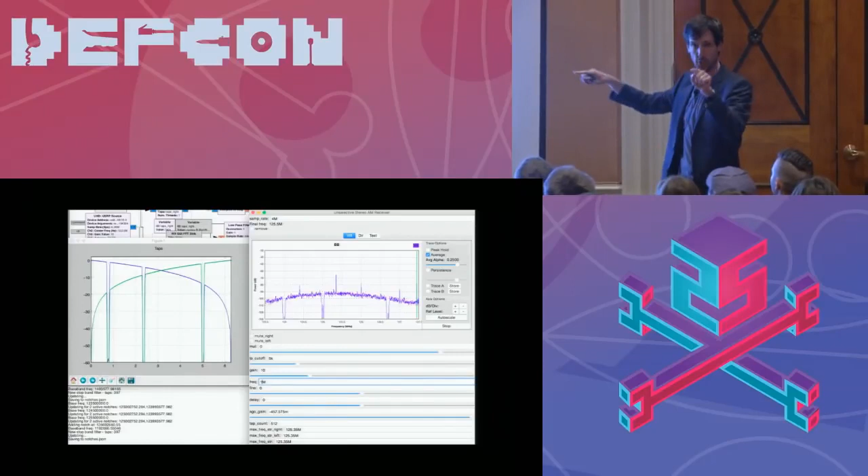And so I thought it would be cool if you could interactively notch out those frequencies that you didn't want to listen to. And so what this does is, and I'll show you, you can click on the baseband spectrum on the things that you want to notch out. It'll recompute the filter with those notches included, and then apply that to the left and right slopes. And it does it globally, so you can change the frequency of your SDR, and then it'll actually recompute everything that's in your passband and always keep the stuff out that you don't want to listen to.

So if I could have as quiet as you can, I'll turn the volume up here so you can hopefully hear it. And so I'm just going to, oh, there we go. So notice I clicked on that and the tone went away. I don't know if you can get the stereo effect. Hopefully you can. So see, I clicked there, it applied the notch and then recomputed that. And I'm changing the baseband frequency, and so it's shifting all the notches along to keep them on the right frequency.

And so I moved to where there's ACARS, and it's very loud and powerful. You don't want to listen to it, so I notched that out. Notched that out too. So it's cool, right? Because I'm not actually clicking on the channel that I want to listen to. It just all comes in and you hear the most powerful thing.

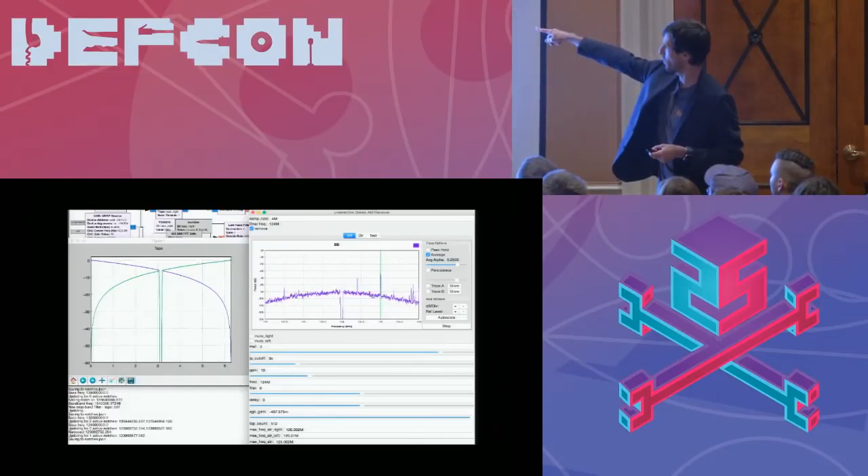And then what's nice is that you can click on remove if you want to remove a notch, and then click on the baseband spectrum, and then it'll actually remove that notch, recompute the filter, and then you get, in this case, the unwanted tone back.

So that's that. Now, I mentioned that slope filter, and it wasn't immediately obvious to me how you generate that. And it turns out it's actually really, really easy. This is done in a single line of Python in a GRC block that I'll show you. Basically, you use NumPy and use linspace to create a ramp between 0 and 1 over the number of taps that you want. You do an FFT shift, so it basically rearranges one half and the other half back to back. You do an inverse Fourier transform, and then you shift it back.

So what you've done is essentially you say, I want this frequency response, and then you take the inverse FFT, and then it gives you the time domain taps that you can apply in a normal FIR filter. And that's all it is. It's really basic. So I've got a blue arrow, which means show you the actual thing. Now, any questions so far?

Who actually listens to the Aero band and listens to cockpit and tower and all that kind of stuff? A few of you, all right. Was there a question over there?

Just curious, with the interactive notch, you could do equalization to null out tones that are continuous, but is that too computationally intensive across that wide spectrum? So that's a very good question. So I don't have to repeat the question because you've spoken to the mic. Yeah, so

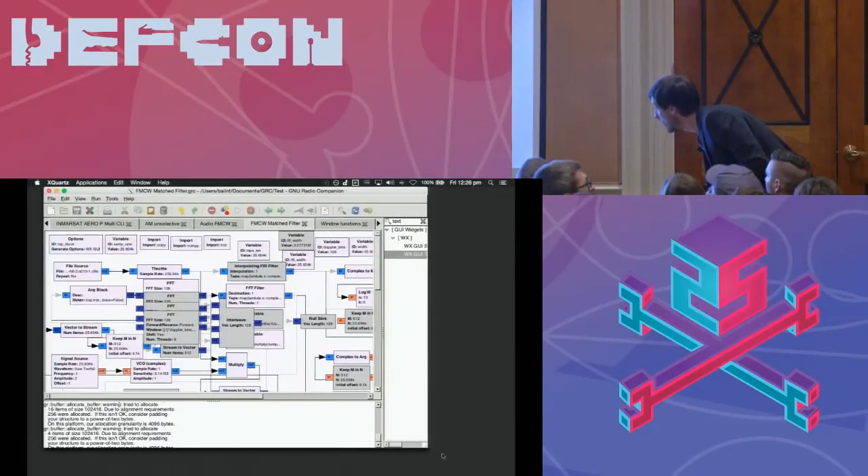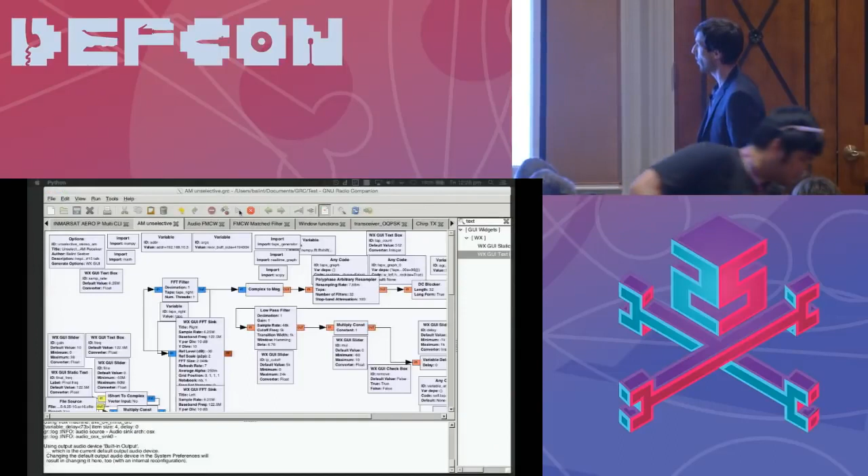So let me find the flow graph here. I'm going to have a resolution problem, so let me just transfer this, make the thing fit. All right, so I'm looking for AM unselective, and turn that off. So I'm going to just do a live demo, or not a pre-recorded demo.

So that's that, and that's that. So at the moment I've got a single notch in there, and if I take it out, you can hear the tone, right? You don't want that. So if you watch in the console there, I've got this notches.json that contains the list.

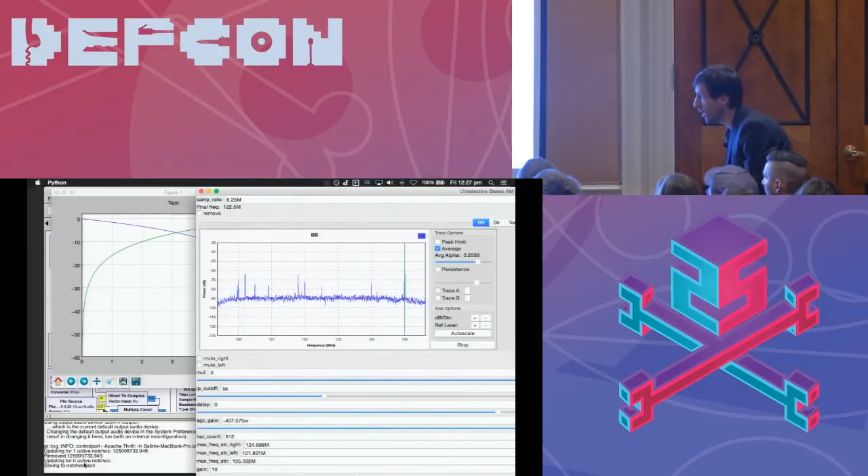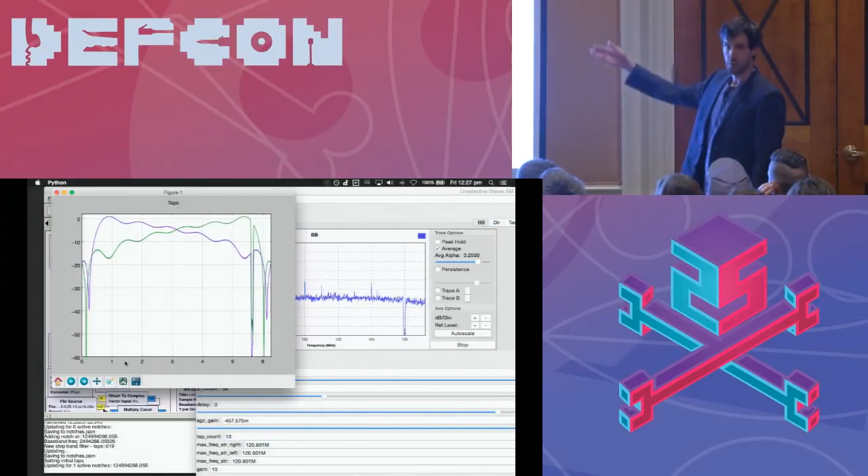So if I click this, then it'll load the notches, calculate a complex filter, and then rotate it up to the baseband frequency that I selected, and then apply that here. And what's nice is that you can also change the number of taps. So if I made it 13 instead of 512, then obviously it changes the look of your frequency response.

And one other thing, my friend Ian Buckley observed this, that if you actually add a delay between the left and the right channel, especially if you're on headphones, then it emphasizes the stereo effect even more. I don't know whether we'll necessarily be able to tell here, but if we make, I think this was like, yeah, you'll need to play with this yourself. But you can add a delay to emphasize that. And you can mute the left, mute the right.

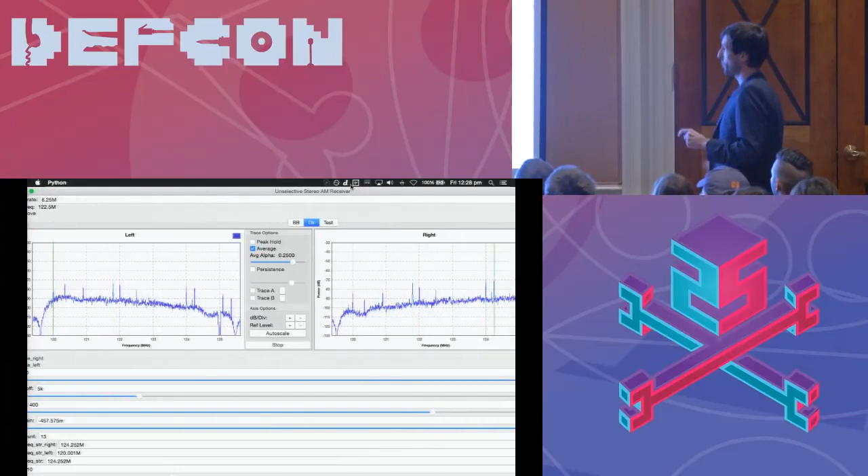And if you look at the actual response of the output of each filter, you can see the baseband plus the filter showing that characteristic roll off to one side and the other one. And the green lines that are appearing are just basically selecting the FFT bin that has the strongest energy in it. So that's most likely the audio that you're hearing in that frequency, which is being updated at the bottom there, max frequency right and left.

So again, this is just the implementation. The original idea was Kevin's, but I thought it might be fun to implement in GNU Radio. I can take you through the flow graph very quickly. I've got a file source here, and then you get your complex baseband output. And as I mentioned, you take one line up to one filter that contains the right channel taps, and then you take the baseband to the other filter that has the left channel taps.

And what's nice, actually, is that you only need to compute one set of taps, because the other channel is just the same taps, but in reverse, which is handy. And then once you have done the filtering, you immediately do the complex to mag, which is the AM demod step. And then you resample it to match the sample rate of your sound card.

I've got a DC block in there as well to remove any DC from the AM demodulated signal. I've got an AGC so that the audio level that comes out the speaker is always more or less normalized. A low pass filter, since AM is quite narrow band here, so just to focus on that one channel at the audio pass band, and then it just goes into one channel of the audio sink. And that's all there is to it.

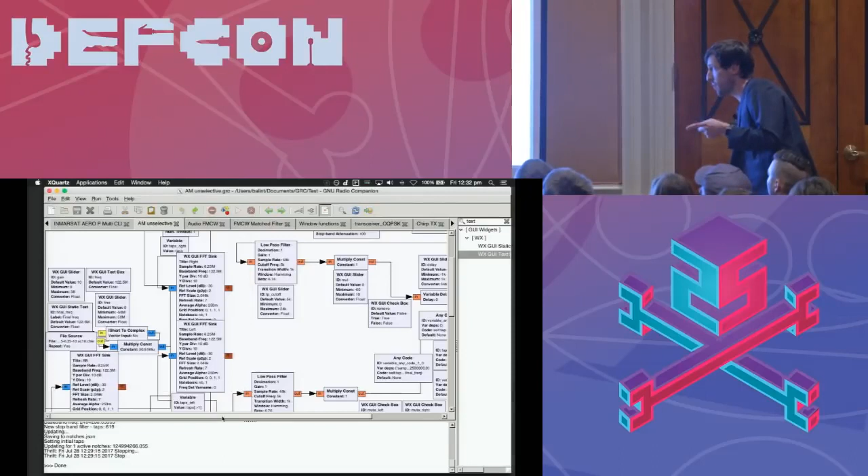And then in terms of actually clicking on stuff, there's a callback mechanism here. With these FFT GUI sinks, you can specify a variable to take the frequency that you clicked on. So when that variable changes over here, then I have a little bit of Python that's a class, and it has this add notch function in it, and so it takes the click frequency.

And if remove is disabled, then it adds the notch, and if remove is enabled, then it removes the notch at that frequency. And so there's just a little bit of Python that manages the global database of values. And once that happens, I think it's here.

The tap generator class is initialized here, and it basically takes the initial set of taps, which is just that initial left and right slope, and then self.taps is, I think, a reference to the actual taps that the generator will update. So the generator will generate new taps and then call a callback registered within GRC to update the taps, and then it will update in the FFT filter and update on the graph.

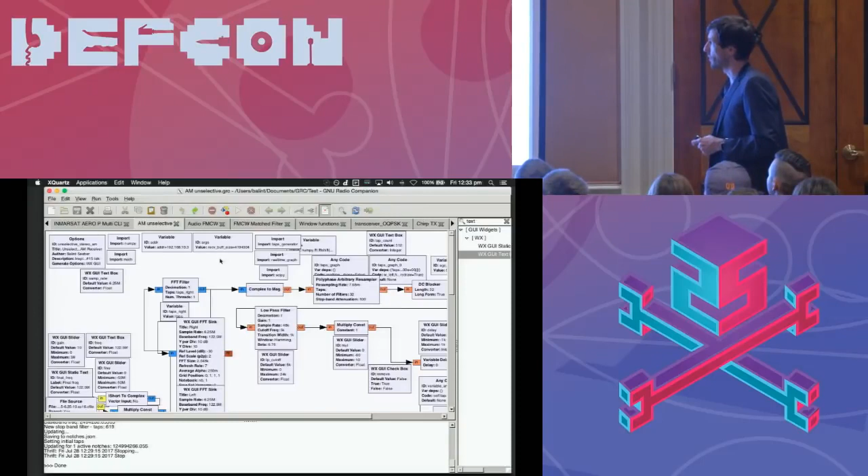And that's it, really. So conceptually, at least, it's pretty elegant. And again, that's props to Kevin for figuring that out. Any questions on any of that so far? Okay.

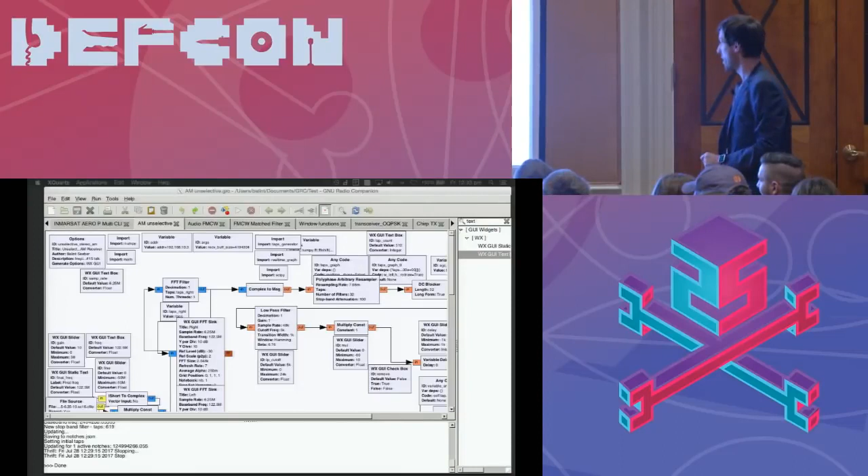All right. So next on the agenda, this is the third and final part, is radar, and particularly FMCW radar. I spoke a little bit about this last year, but I'd like to show you some more and explain some more concepts to you as well. And to do a bit of a recap, who's seen these primary surveillance radars at airports when you fly? You see them rotating there.

This is a basic kind of CW radar. And if you watch here, as it rotates, I'm sitting on a hill with a USRP on the frequency. And on the left-hand side, it's plotting the magnitude of the signal received. And you can see that it's triggering, play it again, it's triggering on the initial transmission from the radar, and the radar then switches to receive mode to listen to any echoes that are coming back from, in this case, airplanes.

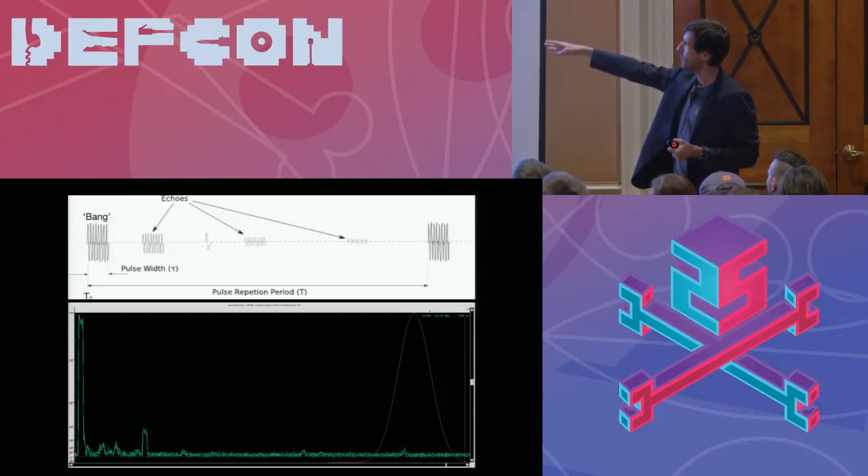And you can see there that there's also some responses coming back very close in time. So I'm picking up both the initial burst of the radar and what turns out to be ground clutter, mainly nearby. And so what is a radar return and how does that work? So this is an example return down the bottom, just complex IQ that's been, again, turned into AM essentially, the magnitude. And the way it works is that the radar sends out what's called a bang, which is that initial short pulse. And in this case, it's CW, so it's just a continuous wave at a single frequency.

And then the radar switches to receive very quickly, and then it waits for these echoes to come back because the radio energy will reflect off, for example, aircraft fuselages, and some of that energy, just a small portion, will come back and be collected by that massive dish that's rotating on the radar. And it's so massive because the signals are so weak, and so you want a lot of gain at the antenna.

And then once that period has elapsed, which is the pulse repetition period, then a new pulse is sent out, and then the process just continues. And this can happen hundreds or thousands of times per second.

And there are some radar concepts which are important to get a hold of. One is that pulse repetition interval or frequency. So that's the amount of time or how many times per second that pulse is sent out, and then the wait period. I'm going to call it PRF, which is the number of times that happens per second. And the width of the actual transmitted pulse, so for how long the radar is actually transmitting.

That's also important. So the way you actually figure out how far an object is away from you is by looking at the delay between when the signal went out and then when you had the signal come back. And this is called the round-trip time. I'll explain that in a little bit more detail in a moment. But if you consider these two diagrams here from RF Cafe, these thick black lines here are when the transmitted pulse was sent out. And then you have this return here that comes back.

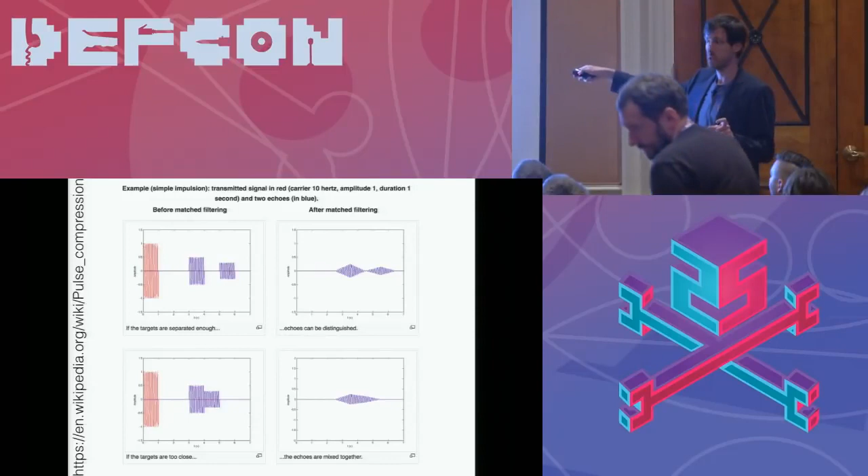And so if you take a matched filter, which is in this case just a filter for the frequency that was sent out, then that means you can ignore everything else. And if you apply the filter, then you get this plot on the right. So you ignore the transmitted pulse, and then the peak of the response here is at the time where that target was. And then this other target is further out, and so you get a lower amplitude response, but again, you get the peak there.

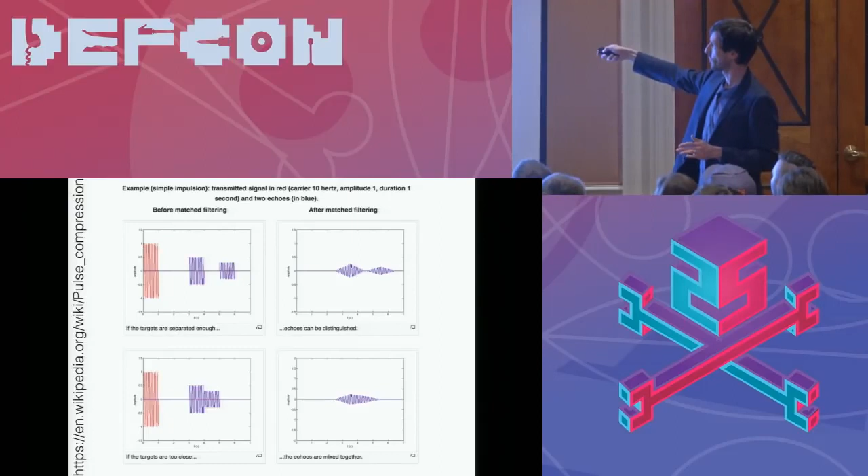And this is not the best, right, because you have this ramp up and ramp down, and you'd like to have a much more accurate definition in the time domain of where that target response actually is. And the bigger issue is that if you have two targets that are close together like this, so those two targets are now not separated by as much distance and therefore time, then the response, the echo, actually blurs together. And so now it looks like there's only a single target if you were to apply a naive detection strategy. So that's why CW has these drawbacks.

And a simple alternative, and there are many other radar alternatives, is FMCW. And what that means is it's frequency modulated continuous wave. So instead of just sending out a fixed carrier wave, you actually send out a carrier wave that increases in frequency, or might decrease in frequency. And this is what it looks like in the time domain. So you start at a low frequency, and then you quickly ramp up. And it might be linear, it might not be, but you can ramp up. And by the end of your transmission, you're actually transmitting a high frequency.

And the reason why FMCW is good is because these chirps, this is known as a chirp when you have something increasing or decreasing in frequency, have the property of strong self-correlation. It's got a really good autocorrelation property. And what that means is if you take that signal and you mix it with a copy of itself, then you'll get a really good response. But if you mix it with anything else, then you get a really bad response, which is not the case for what we just saw with the CW tone, because you get this mixing here and the ambiguous response.

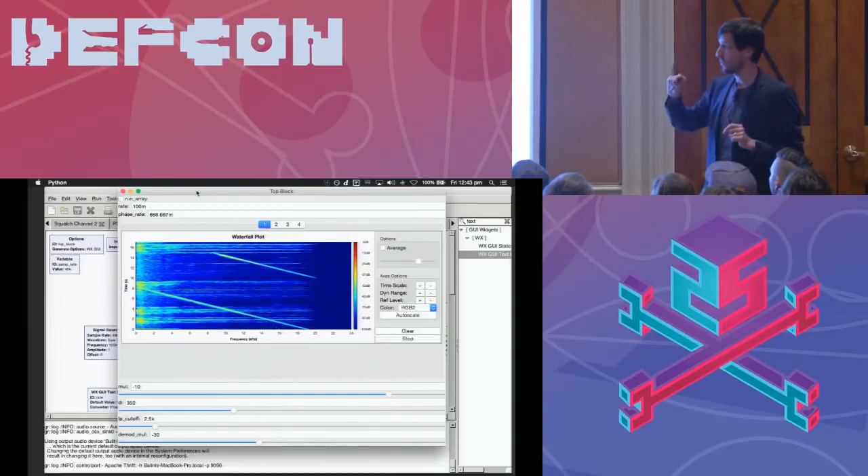Does anybody want to whistle or make a tone? There you go. Just to prove to you that it's live. And now I'm going to let you hear the tone, and you'll see it on the spectrum. So you can't even hear that, but the microphone and the speakers still generate a response. Okay, so this is a chirp. It's a very slow chirp, but it's a chirp nonetheless. The radar chirps are much, much quicker, and I'll show you what that sounds like and looks like in a moment. So this is the frequency response.

In the time domain, a common construction that you use is a sawtooth wave. So usually for a signal source in GNU Radio, you might have a sine wave. But here I'm using a sawtooth, and I hook that up to a VCO, a voltage-controlled oscillator. So what I'm effectively doing is I'm putting in a linear ramp, a linear voltage control, and then the VCO will turn that into a frequency modulated continuous wave. And we can see what that looks like here.

So I'm going to speed up the chirp here with the, where is it? Do I not have that exposed here? Delay, multiplier, low pass cutoff. Ah, here. So this will take 10 seconds to do the chirp. I'm going to make it do it every second. Right? Now I'm going to make it do it 10 times a second.

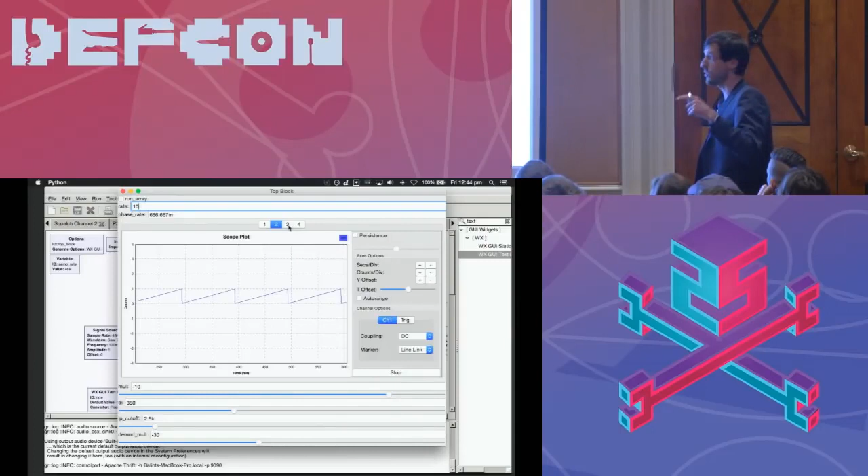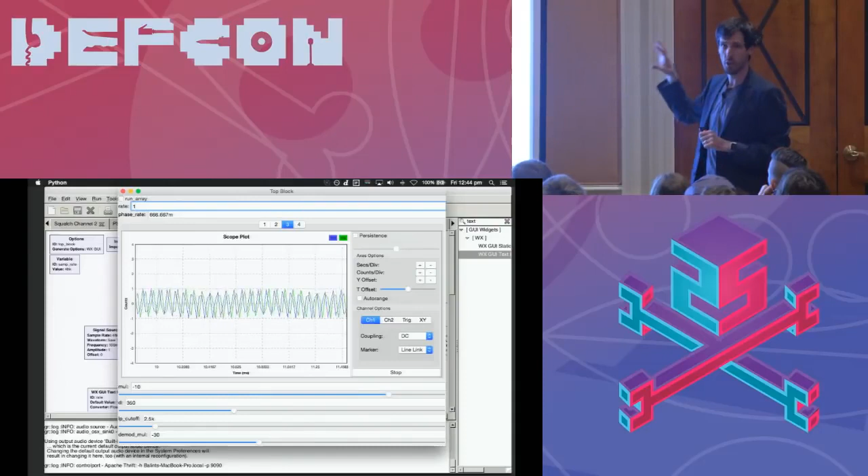Okay? Now, if you look at it in the time domain, this is the output of the sawtooth generator, right? So this is not the FMCW output yet. This is just controlling the VCO. Once you feed that through the VCO, it looks like this. So let me slow that down so you can see it a little bit better. This is the time domain plot of the complex output of the VCO block. And you can see that you get a complex sinusoid, but it's increasing in frequency and then it resets. So this is the basis of a chirp radar. We're listening to the chirp here. All right.

So again, this should be familiar to you now. We saw it in the complex domain, but here it's in the real domain. Now, in this case, we've been listening to a full duty cycle chirp generator, so it's constantly generating the chirp, and as soon as one finishes, the next one starts. In the radar scenario we looked at before, we sent out a chirp, we were quiet for a while, and then we sent out another chirp.

You can do both. They're both equally valid. They just require different sorts of hardware configurations. I'm going to start talking about the full duty cycle continuous version now. What did I say there?

So usually there are low-pass filters and high-pass filters, and you can think about how they might shape the spectrum. You can make a filter of whatever you want. You can even use filters in the digital domain for like the access control word or a preamble for a digital packet. Here, our filter is actually going to be the chirp itself. So the idea is that whenever it hears a chirp and you put it through the filter, you will get the maximum response from your filter when the incoming chirp lines up with the chirp that we've defined in the filter.

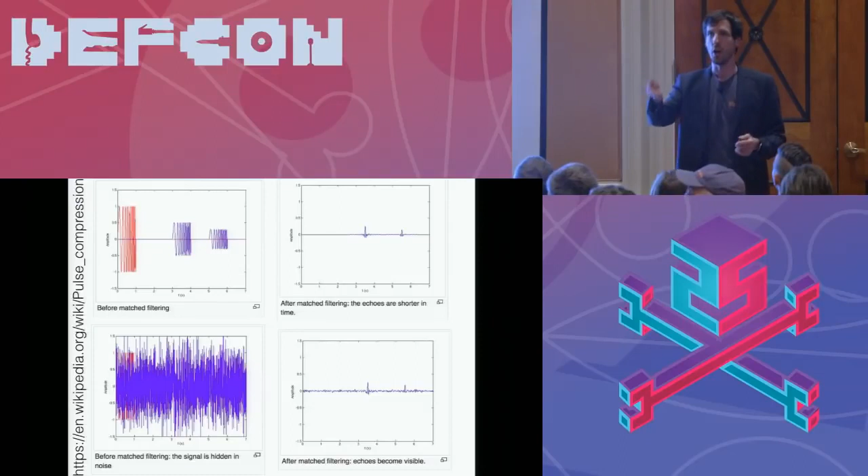The point is raised that if you wanted to figure out the rotation rate, what you would do, completely correct, is you would run an autocorrelation with the capture and do a correlation with itself, and as soon as the similar kind of features match up again, you'll get a response at the time where the radar has completed a single rotation. Thank you very much.

Any other questions? That's great. Thank you for these questions. It's really good. No, I'll move on then.

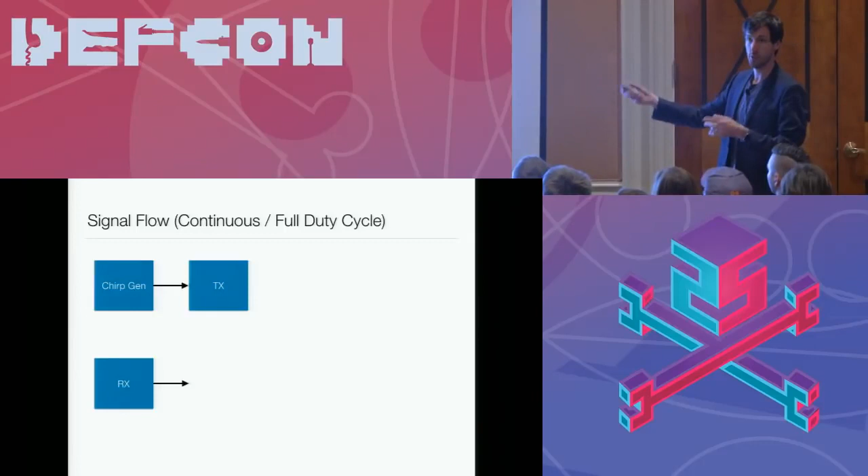So with this continuous or full duty cycle radar system, you have your chirp generator, and that's transmitted. As you heard here, it's being transmitted out of the speakers. And then the receiver, in that demonstration, was the microphone in my laptop. And there, I then mix the input with the chirp. Because we're receiving and generating this simultaneously on the same hardware, the clocks are synchronized.

Because I'm using the audio hardware, that doesn't allow you to start transmitting and receiving the streams at the same time. That's different on, say, a USRP, which I'll show you next. And that's why I have this delay slot factor that you can change, and I'll show you that in a minute. But you mix the two together, and then you get the de-chirp signal.

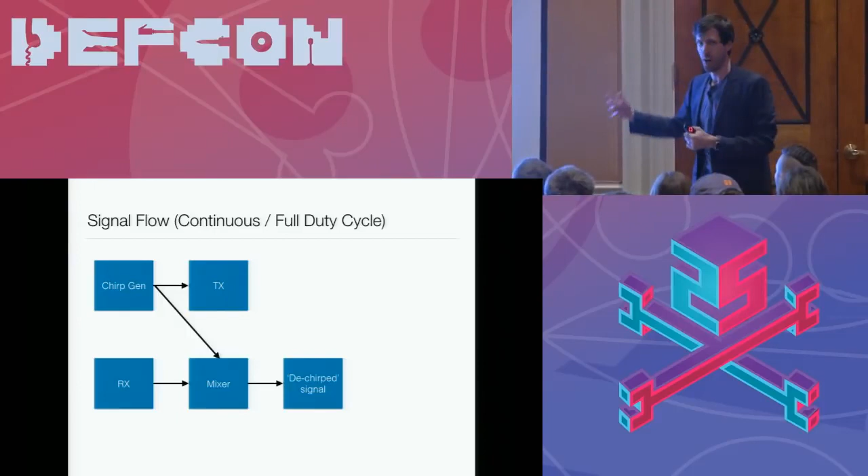And the de-chirp signal holds wonders that I'll try to explain to you, but it means you can do some really sophisticated processing in a pretty simple way and get much richer information about what's going on in the space around you. What's important to note is that once you de-chirp the receive signal, you get constant tones. When it de-chirps itself, you'll just get a DC tone, and any other reflections will generate other tones at different frequencies. And that's the key there.

The cool thing about chirp radar is that once you de-chirp stuff, your reflections become tones at different frequencies, and that frequency is controlled by the distance from your radar, which is kind of mind-blowing when you think about it. It's just a really nice way all the math falls out. And then you can just use FFTs and do cool stuff.

Does that relationship depend on if it's a linear or a logarithmic chirp? I don't think so, because you're still just doing it on the basis of the response of a filter. So you're still looking for a peak response. You could send out any kind of signal you wanted to. And I'll demonstrate that actually.

The last thing I'll show you is passive radar using exactly these concepts, using digital television signals off aeroplanes. So stick around if you want to see that. That's what this is building up to.

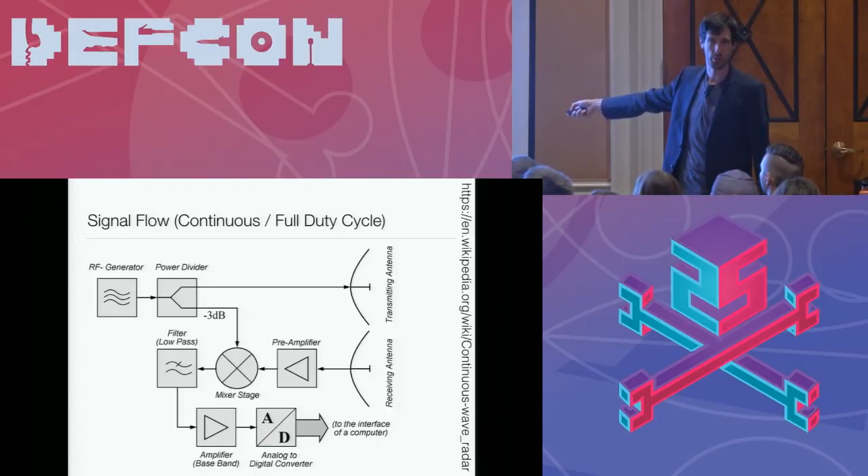So that's this simple kind of structure. So what I'm going to try and do now is take you through how you do range calculations, and then, this is the magical new part, how to do Doppler calculations using FMCW and GRC. And it's basically all FFTs.

This appeared like this massive mystery black box to me for the longest time. When I finally sat down and looked at it, it's actually really, really elegant. So my goal here today is to make you try to understand at least a little bit of this. So this is a plot in the frequency domain, right? We talked about chirps. We know that they look like this on the spectrum.

Here you've got time going from left to right and frequency from bottom to top. And the red signal here is the chirp that you're transmitting, and the green signal is the echo. So remember, an echo is just going to send back what you transmitted, but with a delay in time, right? So as you can see, the green is delayed a little bit, delta t, from the original transmission.

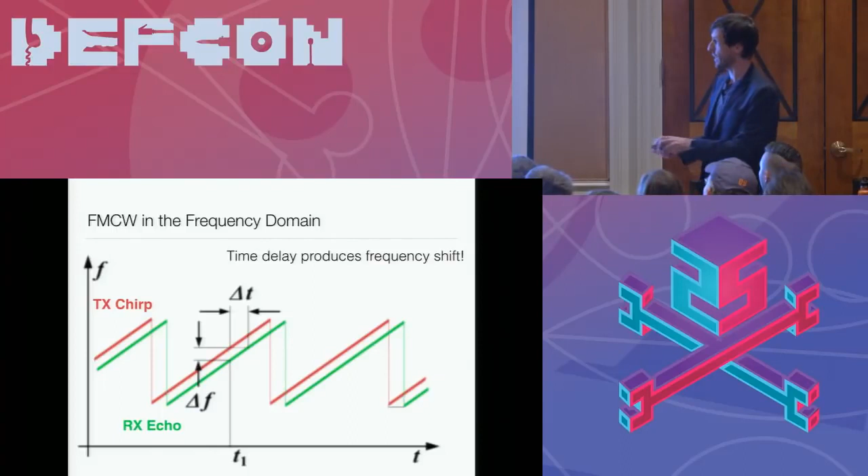Now, the beautiful thing about this, as I mentioned, is that any time delay will produce a frequency shift at any single sample in time. So if we look at time t1, you've got a frequency shift from your transmitted tone at that particular point in time to your received echo.

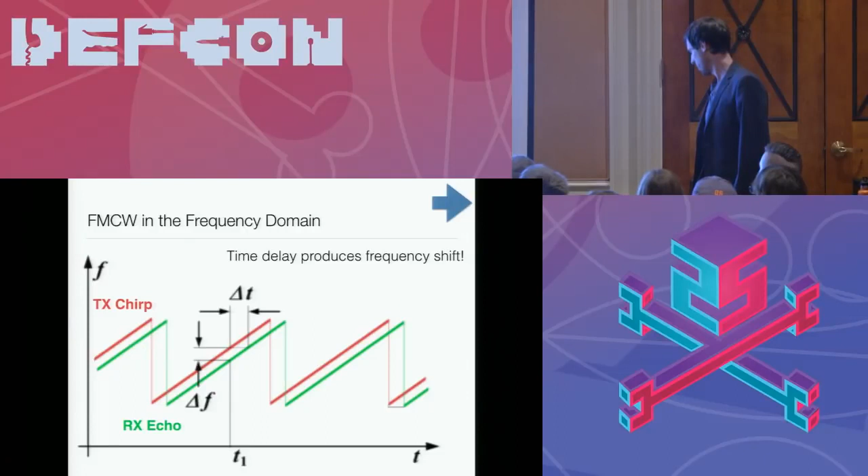And what happens is, what was I going to demonstrate to you there? Maybe the whole thing here. Yeah, that's what I was going to show you, I remember.

So going back to the audio demo, we had this, right? And we know what the VCO input looks like, we know what the VCO output looks like. And now we're going to look at the FFT of the output of the de-chirping, of the mixing, right? So what this is doing is it's taking the chirp and then it's going to multiply that by what is being received from the microphone.

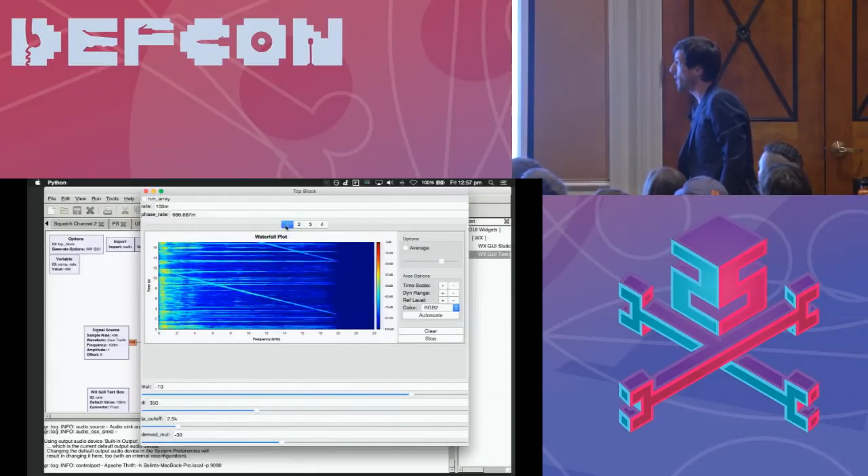And what you'll notice here is if you compare this one to this one, hopefully you'll see it looks like the spectrum is being rotated over and over again at a fixed rate. See how it looks like the entire spectrum is shifting? So actually, do people want to whistle? You'll see your whistles come out, but there'll be diagonal lines here.

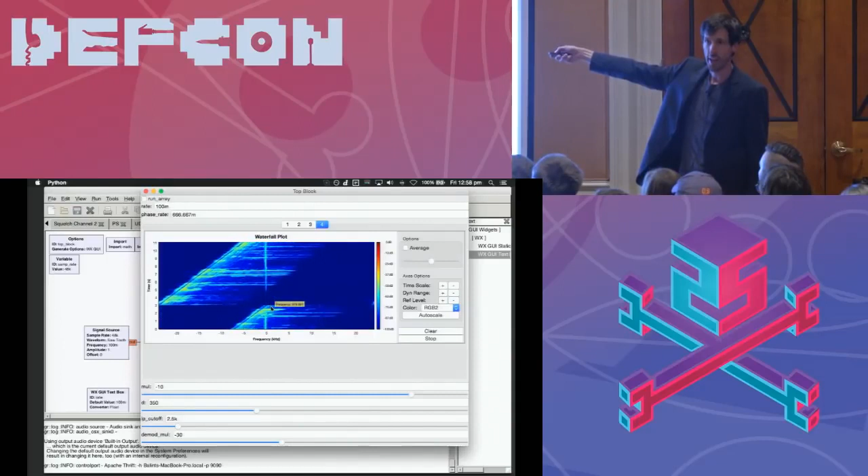So see, this is me. And this is the cool thing. Our chirp signal, remember I was telling you it would turn into a fixed tone? Can you all see the fixed tone here? It's that line coming down the middle at roughly DC, right? That is the tone that we want to receive.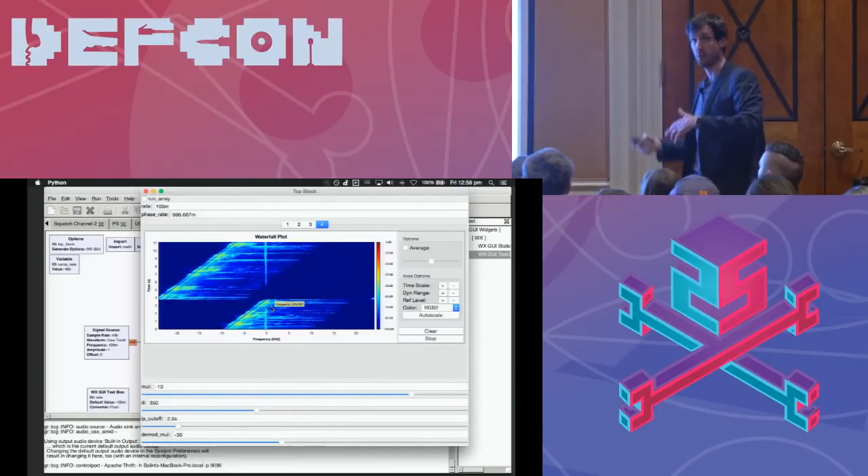And any other tones that end up, I think in this case to the left of it, will be echoes that have come back from around the room into the microphone on the laptop. And so that frequency difference, because remember this is in the frequency domain now, is going to give you your virtual range information, right? Which is pretty neat.

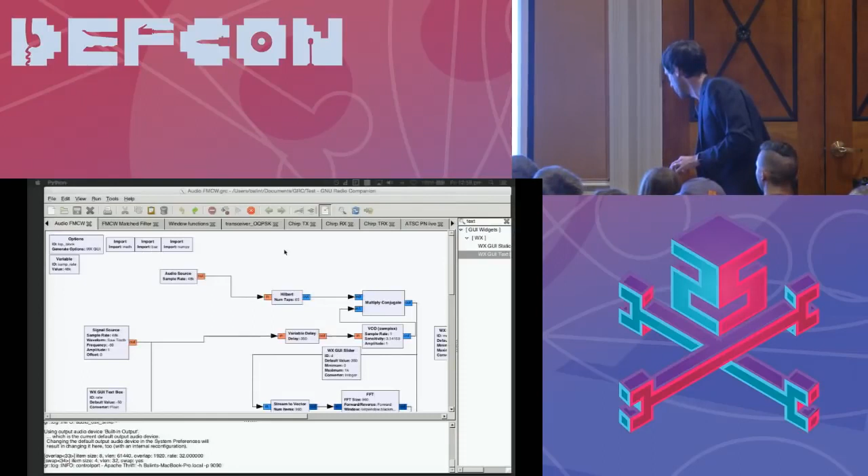Now, what does this look like? I showed this last year, but I've hopefully explained things a little better so that it makes more sense. What I'm going to show you now is the same thing, but actually running in the proper mode. So this is the chirp again. It's running at a higher rate because we want to be able to update the display more. And you see when I'm talking, it's still picking me up, but because it's constantly rotating the spectrum, it doesn't look like a proper frequency response now.

So what I'm going to do is get my other laptop to be the target. And I'm going to set my delay slider so that you see the DC part of it somewhere. Okay, apparently it's not there.

Nate Temple, the genius here, pointed out that I'm trying to move my laptop in front of speakers that aren't actually outputting anything. I want to use the speakers in my laptop because that's where the microphone is, not those speakers. Thanks, Nate.

Nate is an absolute legend, by the way. If you didn't get to see his Cyberspectrum talk from the other night, I recommend you go online and watch it because he has built some amazing stuff.

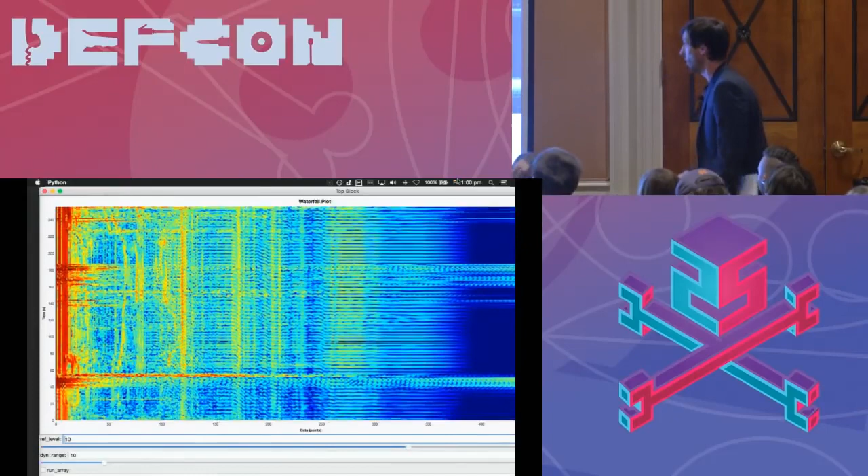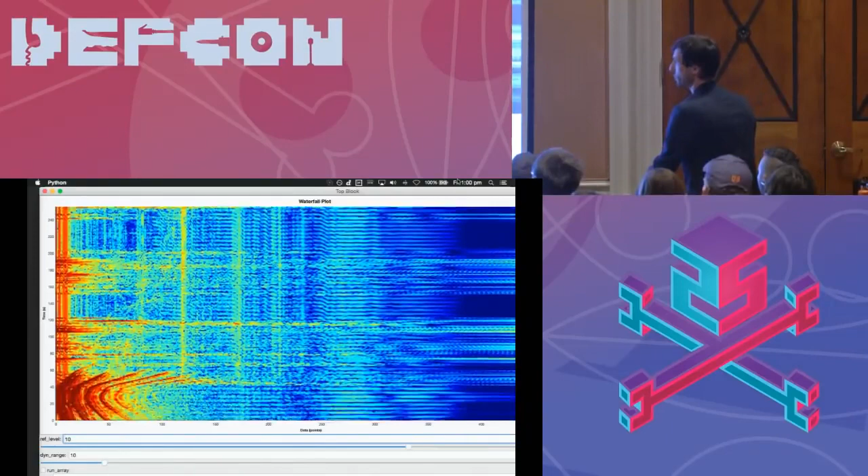All right, here we go. This is better now. So what I'm going to do is, this is the DC component, and because I'm talking, we're just going to get this noise showing up here. But if I put my laptop here, then you can see there's that main response there that is directly related to the height of the laptop.

Don't clap, though, because then you'll upset the microphone. Right? So, that's all right. I planned that.

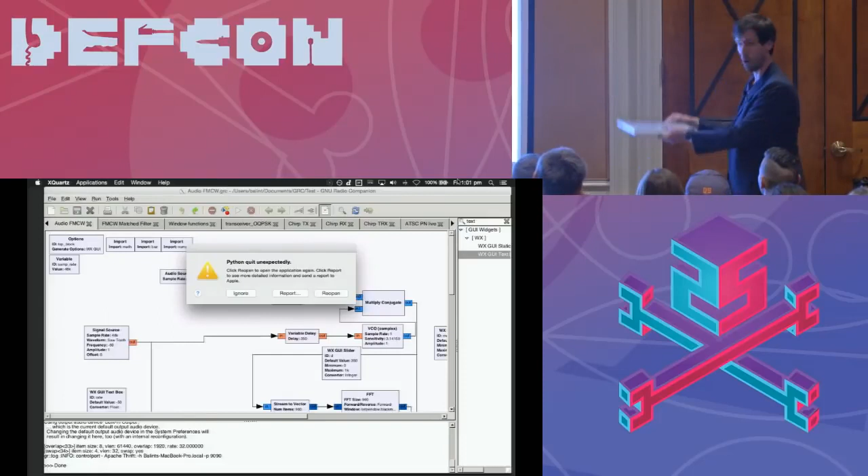So what's happening here? A chirp is being sent out from the laptop. I mean, this is a chirp. Those air molecules are being vibrated, and then that audio wave is moving up, hitting the bottom side of my laptop, and then being reflected back down to the microphone. And amazingly, even though it's hearing itself, the microphone can still discern the response from an object way out here. So that's the power of FMCW.

Now, there was another little thing in there that was on my screen. I will show you that. That's actually the Doppler plot, and I'll come to that. What that gives you is not only range information, but velocity information. So you can tell how quickly a target is moving. And that's really cool when it comes to aircraft.

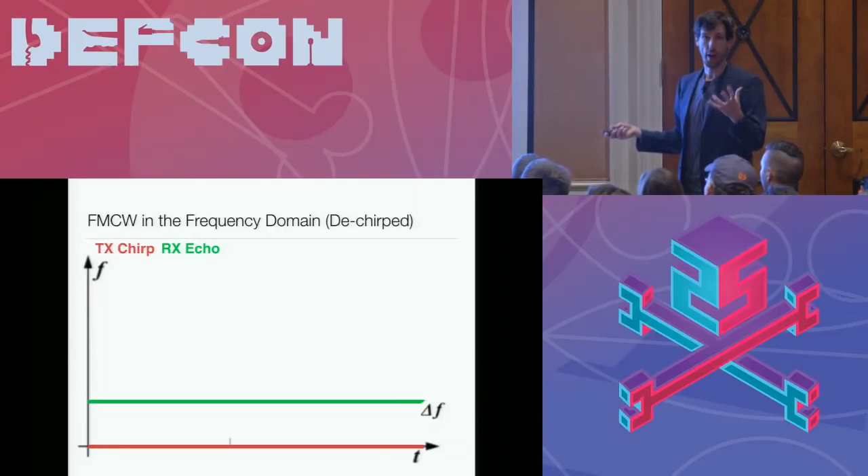So what I want to show you here now is this plot where instead of looking at the original frequency domain, what we received, this is the domain once we've done the de-chirping. So we have that DC component here, and then in the green line, this is now our target return tone, right? Because we've de-chirped it. And so you have this difference in frequency. So the frequency change implies that time delay, and therefore virtual range.

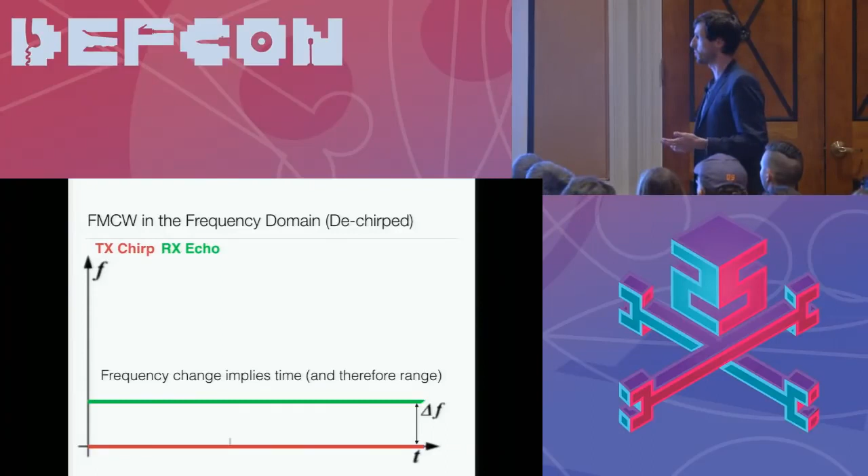Now, what's neat is that you can take the de-chirped output and then pass it through an FFT, right? Because an FFT will give you the energy in each bin. And so the trick here is that you use an FFT. You know how you have a certain size in your FFT, a certain number of points that you transform? The number of points in your FFT, you can make the same number of samples as what is made up in a single chirp, right?

And to calculate how far away that is, you know how long one sample lasts, because you set a sample rate on your SDR, right? So 10 megahertz or whatever, 1 megahertz. So you can calculate 1 over that to get the period of a single sample. And each bin, in terms of duration, maps up with the duration of a single sample.

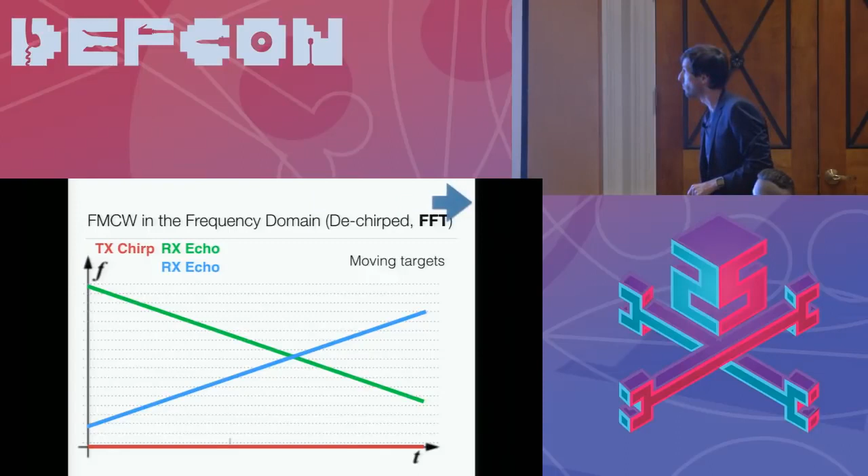Maybe that's what I was going to demo, but I'll do that later because time is short.

So again, as I was saying, the sample rate sets the duration of a single sample and therefore limits your range resolution. Because if you consider you get discretized bins coming out of an FFT, and the total length of that is going to be your unambiguous possible round trip time. And so your pulse repetition frequency sets your unambiguous range, but the sample rate also sets the distinct range that you can resolve within a single bin.

So as you step from one bin to the next, that's going to be some amount of range that you go, from one to the next. And so what you have to consider is that targets, depending upon your radar system, might be differently spaced, but they might fall within the range of a single bin. And so you'll get one return for multiple targets in a single bin, and that's ambiguous. So you want to do something which is Doppler processing to make that unambiguous.

And as I was saying, you've got different radar geometries. So you've got a monostatic system where the transmitter and receiver are co-located, and so it's just a direct line of sight round trip time. But if you have a bistatic radar system where the receiver is separate from the transmitter, then you have to take into account the geometry because that delay is going to be different. You might have a target way out here and you'll have the signal bounce out and then come back, or it might be in between the two and so on. So important to keep that in mind.

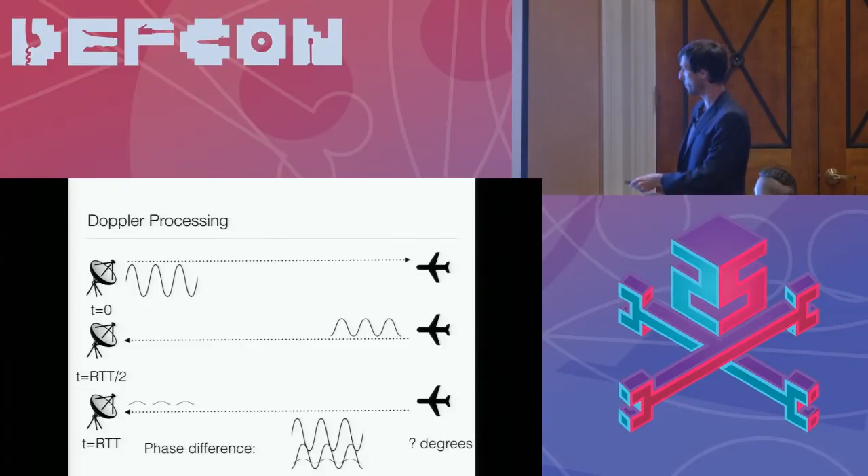And if you notice carefully here, the wave that is returned is slightly offset. See that? So see there and then there. It's a slightly different phase on that wave. And so when it comes back, the phase difference is going to be slightly different as well. And when we compare them, we get some arbitrary phase offset. Now, these are two distinct pulses.

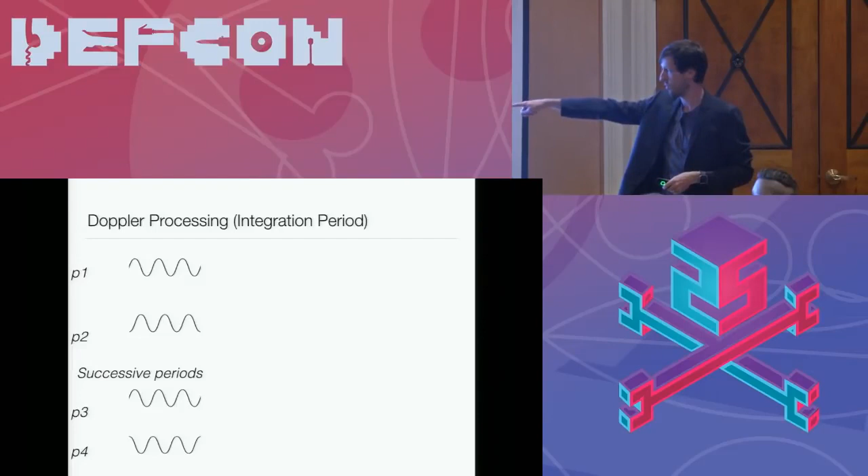Now let's consider 4 in more or less successive time order. So the first one comes back, the second one comes back with a difference, third one comes back, in this case it's different because the plane moved again and imparted another phase change. And then again, we've got a different phase offset in the 4th period there. And remember, every chirp period that gets sent out, we get this different energy coming back to the receiver. It's the same chirp or the same signal. The magnitude will look the same, but the phase will be different.

And what you have to think about is when you do FFTs, when we look at them on the waterfall or when we usually think about them, what are you doing? You're taking the FFT, which gives you always a complex output, and you always end up taking the magnitude of that complex output. And the effect of that is, anyone? You lose data. What do you lose? You lose the phase information.

So here we want to use that phase information. And the integration period is important because that's the period over which you're monitoring these phase changes in each of the range bins. Does that make sense? So the idea is to get that phase information from each FFT bin over that integration period. And then think about this. What is a changing phase over time? It's a rotating, what's the magic P word? It's a phasor, right? So you've got a phasor going around.

And I think I have a blue arrow here, yes. So, just to illustrate that a little bit more, very simply, in GNU Radio, because we usually use fast sample rates, everything is high frequency. Here I've got a signal source, which is a sine wave. The frequency is 0.2 hertz, okay? So that phasor is rotating very slowly. And we can very easily illustrate that. This is an IQ plot. It's a scope plot in XY mode. And you can see the samples. This is a normal sine wave, right?

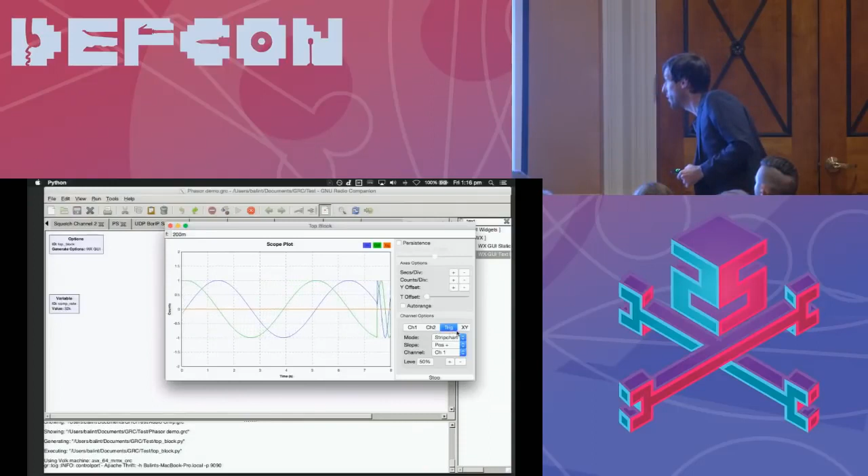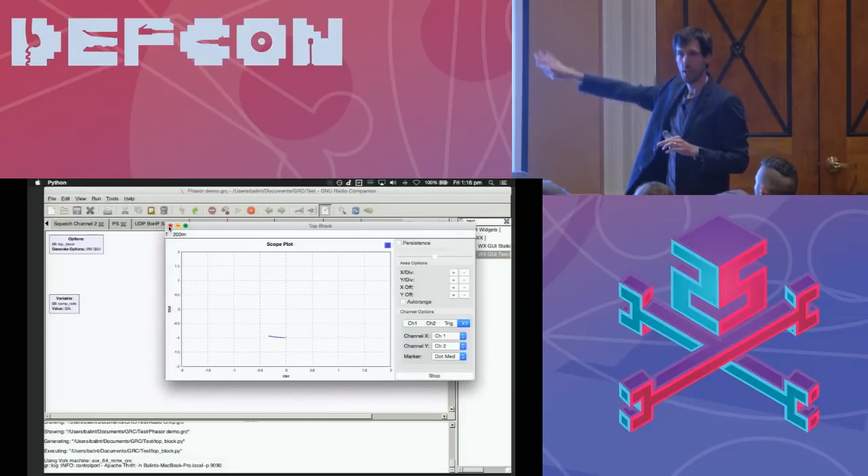Where are you? It takes a long time because it's slow. There it is. Let's go, I think, strip chart. Yeah, there it is. So we have the normal sine wave that's being generated. But if you look at it on XY, then it's just going to be a phasor that's rotating at a fixed rate around your unit circle on a complex plane. And so what I want you to think about is exactly this in a single range bin. So you got your echo coming back, it's changing in phase, and so you'll get a bit of this in that range bin. And of course, what happens when you take the FFT of a sine wave in this case? You'll get a response in some bin that maps to the frequency of the thing.

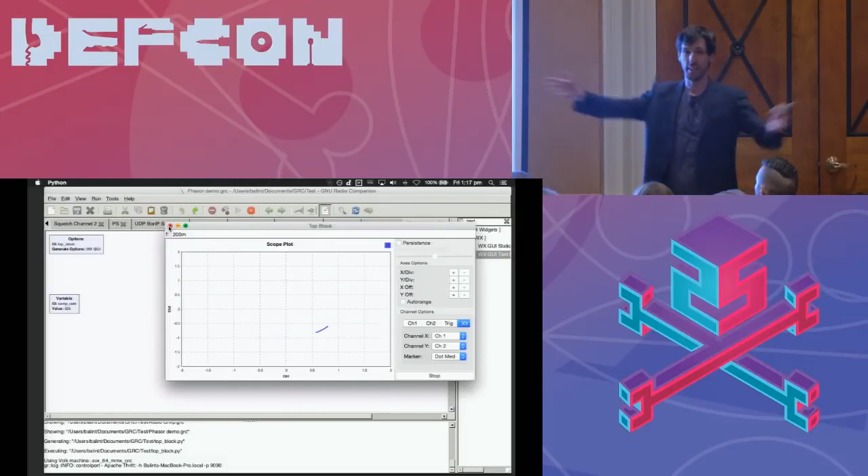So what does that imply? Can anybody tell me? Once you end up taking the FFTs of the columns, maybe I'll show you the next slide and somebody can tell me. So we did all that.

Okay, so, microphone stopped working? Hello? Oh, there we go, testing. It's not even wireless, so we couldn't have blamed somebody trying to DOS my mic. Right.

And then once you've populated all of these with the complex outputs of the first FFT part of the range information, you take the FFTs column-wise. And so you're doing an FFT to look at the phase changes of the returns at each range bin. And what does that mean? The Doppler shift and the movement of the target imparts the phase change, and that causes that phasor to rotate. And the faster or slower, and whether it's forward or reversed, rotating in that phasor, tells you how fast the object is moving.

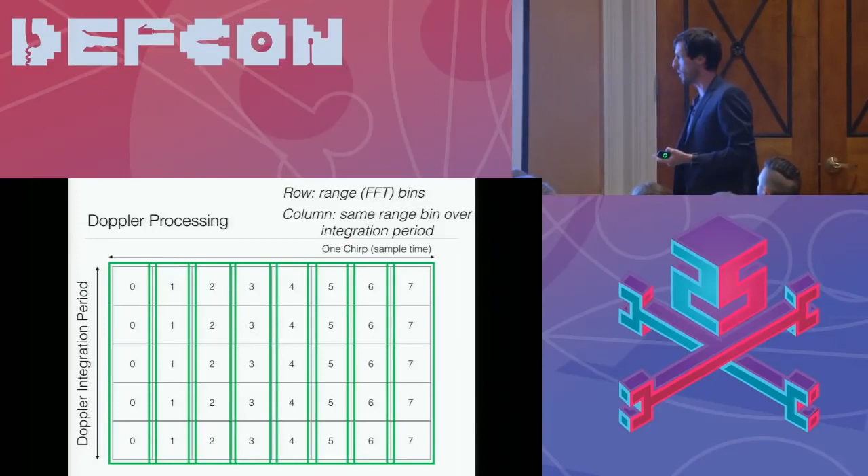now, remember this slide earlier in the presentation? What was I showing you when I showed that slide? An interleaver. Look familiar? Interleaver? So what you can do in GNU Radio is, I just wrote a simple row column interleaver block, and it takes the output of the first FFT stage, and then once it fills the interleaver, it outputs everything into another FFT, and then you've got all your data, range and velocity information.

Okay, so interleaver. And so this is a neat little tweak that I made to my interleaver. Usually with an interleaver, you need to fill up the entire interleaver, and then you can read it out, right? So you fill up all the rows, and then you read it out all the columns. What I did with my interleaver is that you can set, I can't remember what the variable is, but you can actually cause it to read out more quickly.

So it'll actually fill up, let's say there are 8 rows. Instead of outputting all the data once it's filled up 8 rows, it fills 4 rows, moves everything up, fills up the last 4 rows, moves everything up, and then outputs all 8. And then it fills the next 4, outputs all 8, and then fills up 4 and outputs.

And so effectively you get twice the output coming out of your interleaver, which means that even though you might have a long integration period, like 10 seconds, we don't want to be waiting 10 seconds to update a pretty plot. We want to update it much more frequently. And so you have your interleaver spit the data out more frequently. So the dechirped signal goes into an FFT, you get your range information, goes into the interleaver, you do another FFT, and then magically you get your velocity information.

So now what I'm going to show you is the original audio demo that I had with the laptop here. And then that plot that I didn't show you is going to be the output of all of this in a 2D image that gives you the Doppler information. Let's see, where is it? Okay, where are we? Audio FMCW. And I will take Nate's wonderful advice again. Use my laptop to speak as a microphone. Let me just fix up the...

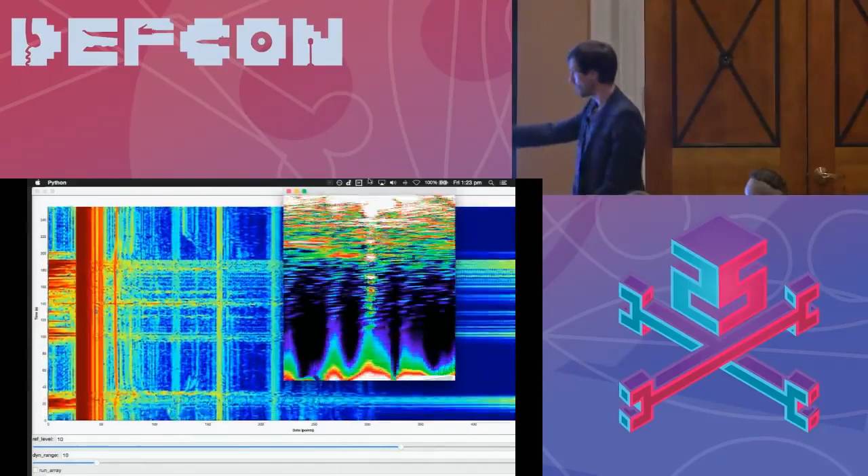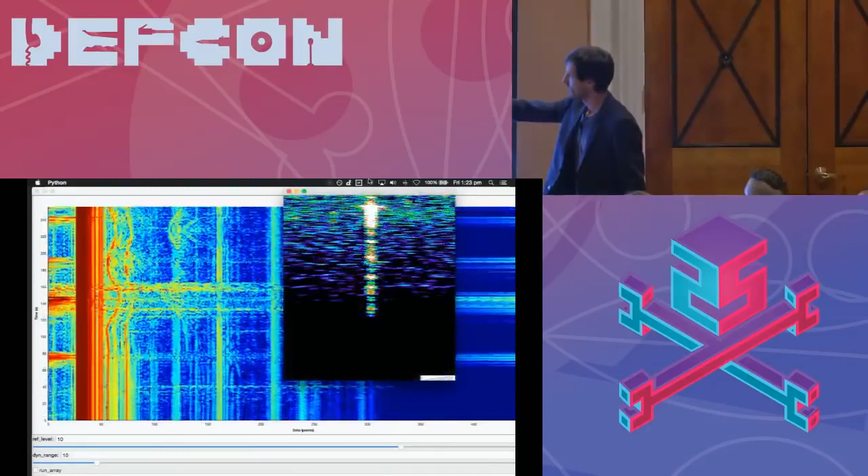So stuff there, actually you see as I'm moving around, I'm actually causing the echo to change. So it's surprisingly sensitive. So yeah, see how we've got the strong DC part there on the left? That maps to vertically that strong bright spot at the top there. So what I'm going to do is I might need to change the color mapping here. Yeah, that's better. All right, let's see how this works.

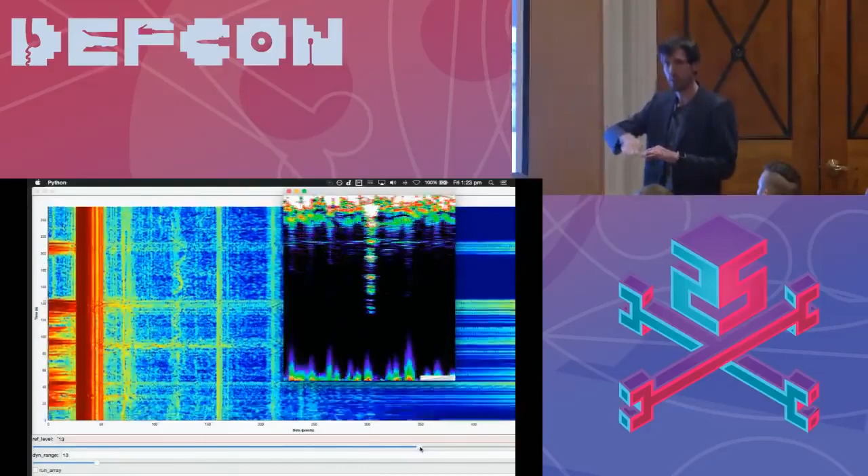So remember, what you'll see is I'm going to be moving the target at a particular velocity, maybe up and down, a little bit slower, a little bit faster, and you'll see a bright spot appear there, either on the left or on the right, depending if I'm going forward or backward. And the distance from the center point is going to imply how quickly I'm moving it. Let's see if this works.

So there's my target. It's a bright spot, right? And notice that I moved it here, and now it's settled, so I'm going to move it more. See, now it's on the left because I'm moving it up. And I'm going to stop, and it's going to come back because I've stopped moving it. Now, you still get the range return. See the bright spot in the middle on the center line? But I'm not moving it, so there's no Doppler.

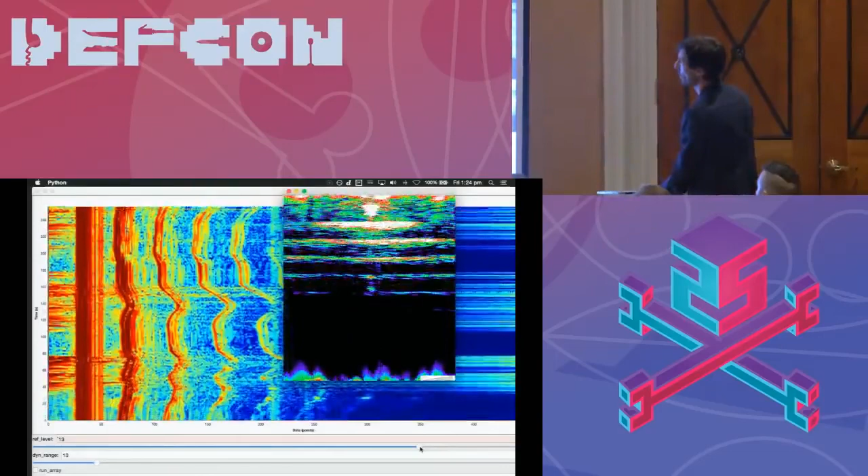Well, I am actually, because I can't keep it totally steady. But it's that sensitive that even as it's waving here, you can see that it's moving left and right. So if I go like this, then you get the Doppler response. See? And that's just using the audio. Now, apart from the multiple echoes, who can tell me why we're getting multiple echoes here? Wait, Skylar, hang on a second. Anyone else with a hand? Guy up the back?

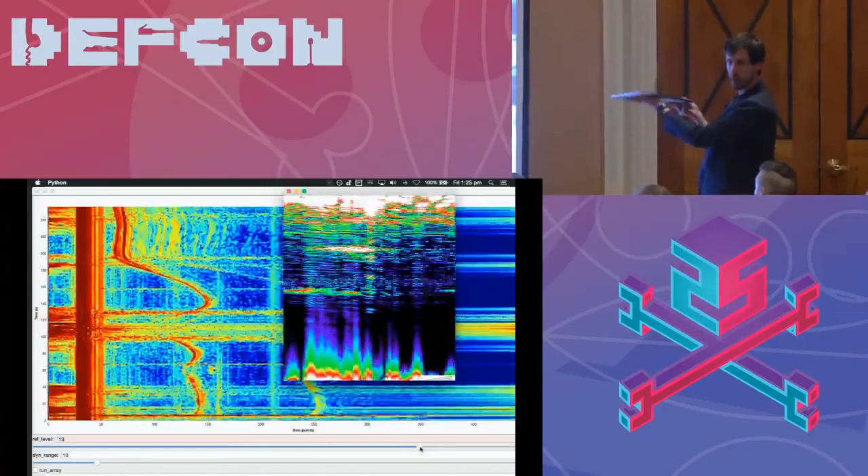Go on. Say it anyway. It's reflecting off your laptop and then back. Yeah, because we didn't have a microphone. But what the two gentlemen were saying was that they're so close that the audio is going to bounce off the bottom of my laptop. It's going to enter the microphone, but it's also going to bounce off my bottom laptop, and it'll keep bouncing back and forth. So we get the multiple returns there. The strongest one's going to be the direct, the shortest path.

The other thing is, look carefully what happens to the bright spot in relation to the edges of this image as I move it, right? So I'm going to move it very slowly to keep it in there, and maybe a bit further out so we don't get all the returns, right? So now it's going to be on the left. I'm going to move it fast and watch what happens.

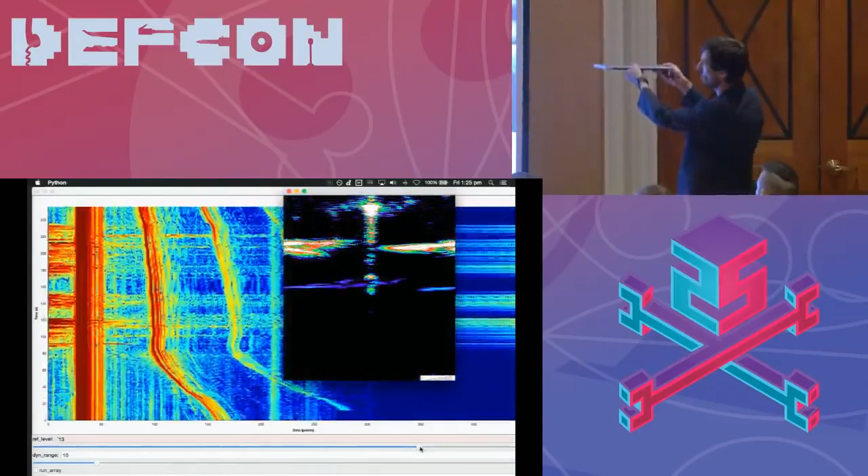Who said that? That's right, it's aliasing. Why are we getting aliasing? The maximum velocity you can represent is less than the velocity that it's going at, so it's getting downsampled, and that is aliasing. Yeah, that's exactly right.

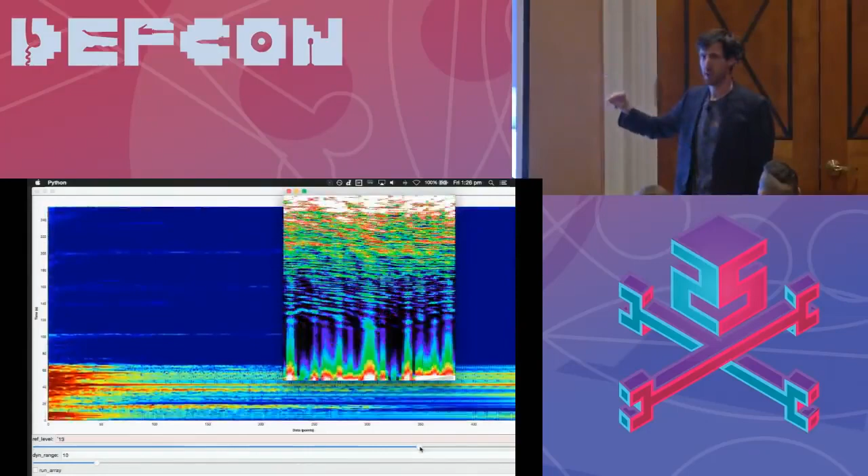So what is happening here is that the pulse repetition frequency, right, how often we send out pulses, will basically constrain us in terms of the maximum unambiguous velocity that you can make out. So once you exceed that velocity, just like with a normal signal, if it's above your Nyquist divided by 2, or Nyquist if it's complex, it will then wrap around because you can't disambiguate above that. It's exactly the same principle.

So this is another constraint that's applied to the radar system depending upon the parameters that you pick initially. So you have to, as a radar designer, define what you want your maximum unambiguous range to be, and then you have to balance that with your maximum unambiguous velocity, because you can't have both. It's got to be either one way or the other. Yeah. So that's basically the...

I need the sound on. Again, very good advice from the audience.

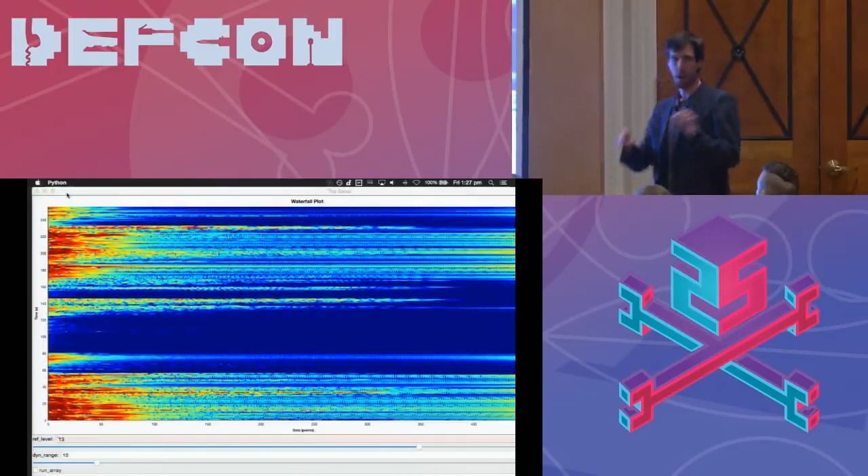So any questions about this? No? So just a reminder then, remember how we were basically doing the interleaving and doing the FFT? That plot that we saw is basically the output of that entire process. So each of the rows was an output of an FFT.

So that's the audio. It's almost time, so if you're interested, I'll show you an SDR version. I've got some directional antennas here, and what I've done is I take the bins that map to the zero range, because remember I was saying light travels really fast, right? So even though I think I'm using like 1 megahertz sample rate, 1 over 1 million is still going to be like 100 meters or 60 meters or whatever it is, and so we wouldn't be able to demonstrate a change in range, but we can demonstrate Doppler because Doppler will still work in the zero bin if we're nice and close.

And what I do is I then do an inverse transform of that FFT at the zero bin, and then I put that to the speakers, and it makes like a theremin, so we can wave something back and forth and turn it into a musical instrument. But I'll show you that last in case we run out of time. You can stick around if you want to see it. Right, so back to the slides.

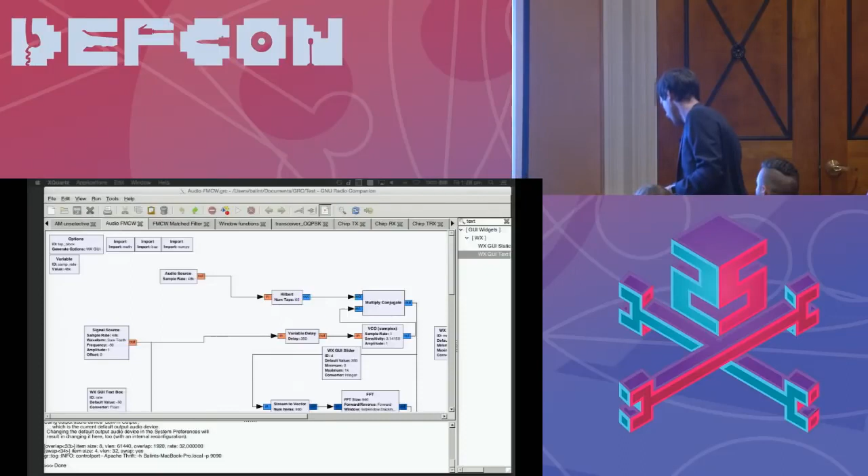Okay, so that's stuff that you can do at home, and I want to show you some stuff where it's used in practice and how you can actually decode that stuff as well. So one is CODAR, which is HF radar used to map the surface of the ocean and map currents, and you can go on various universities' websites that have these set up and look at interactive live plots of currents over the ocean.

The idea is that you send out an HF wave, it'll hit the crests of ocean waves, which will reflect them back to the receiver, and those ocean waves will also have a velocity component to them, which will then change the phase, and once you do Doppler integration over time, then you can get both range and velocity information of ocean waves. And then they have them distributed in certain ways.

And they do something interesting, which is gating the transmitter. So if you look on an ordinary plot, it looks like it's just a chirp. But if you look very closely with the right parameters, you can actually see they gate the transmitter on and off to give it that dead time to receive a return.

And the side effect of this is that when you take an FFT, you actually end up getting sidebands on your main signal. And you might think they're returns, but they're just a result of doing the frequency transform of this gated waveform. And if you do the math, they're like millions of kilometers away in terms of range. And so the stuff that you want to see is really, really close in.

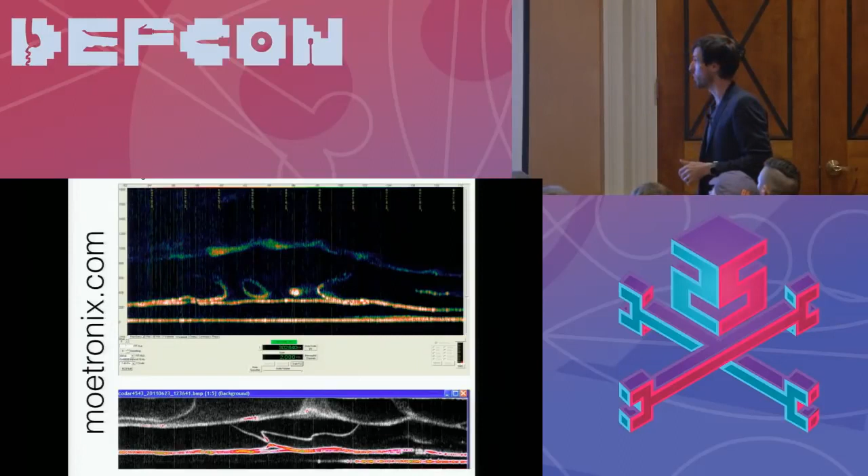And then this is one of RF Space's tweets. Really, really cool stuff. And then this is in SpectraVue producing on the plot. So in this way, you can use the signal in an unintended way to look at natural phenomena that are going around the Earth. And another very, very amazing SDR guy, Juha Vierinen, he's done incredible stuff. He's used this kind of UHF radar to map the surface of the moon. Amazing paper. He's done some really cool stuff with ionosondes.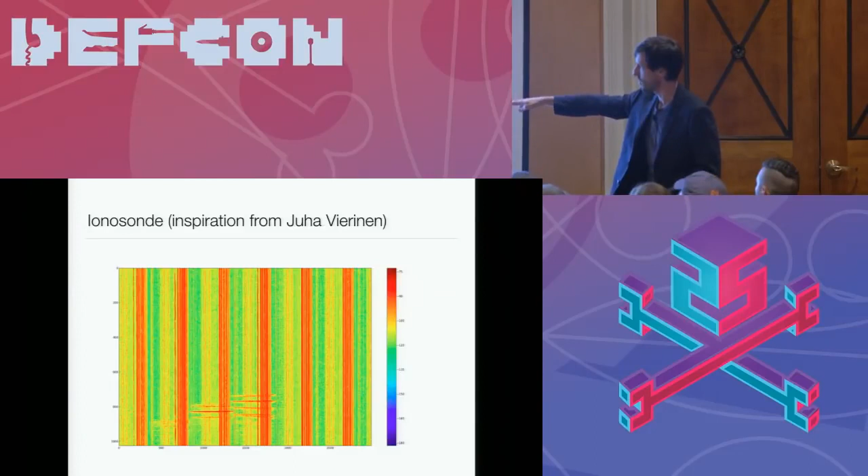I tried my hand at this, and so you also get those multiple returns. This is sort of frequency over time. As an ionosonde sweeps the entire HF spectrum, you can similarly de-chirp it, right, because it's just a chirp, and then get these multiple reflections from the ionosphere.

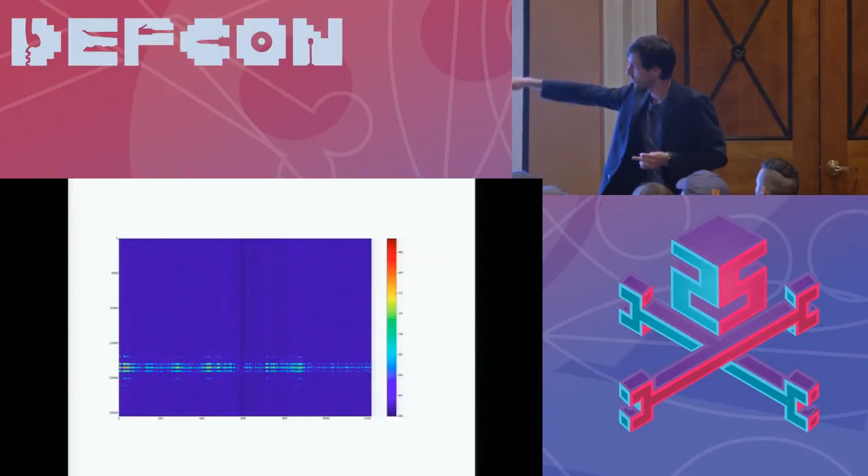We went out hiking, and after the hike, my wife was very kind, and she just read her book in the car. I set my laptop up in the boot and received CODAR from around that area. And you may recall me showing this previously, but the x-axis is time, y-axis is frequency, and so this is the CODAR over time, and you can see the AM sidebands again, and there's some information hidden in there. We're only interested in the center one.

If you zoom in, in this case I don't think I had a GPSDO. They're GPS disciplined, so you want to have a GPS too so that the phase information is correct. Because remember, if you're running your interleaver and the Doppler processing, you want to make sure everything is perfectly aligned and stable. Otherwise, you'll be introducing phase shifts that will actually corrupt your velocity information. So there's something going on there. I didn't know what it was. Again, that's range information effectively in the middle, so you're getting returns somehow.

And then with Ian Buckley, we went out one night and set up and did some captures with a GPSDO. We had a long wire set up and a custom-made dipole. I'm going to show you a video here. This is, again, same kind of output from GNU Radio using that same plotting thing, but it's a modified SDL sink that also outputs a series of bitmaps. And so this is exactly the same process as everything I've spoken about so far, but applied to the HF CODAR returns that I just received on my SDR.

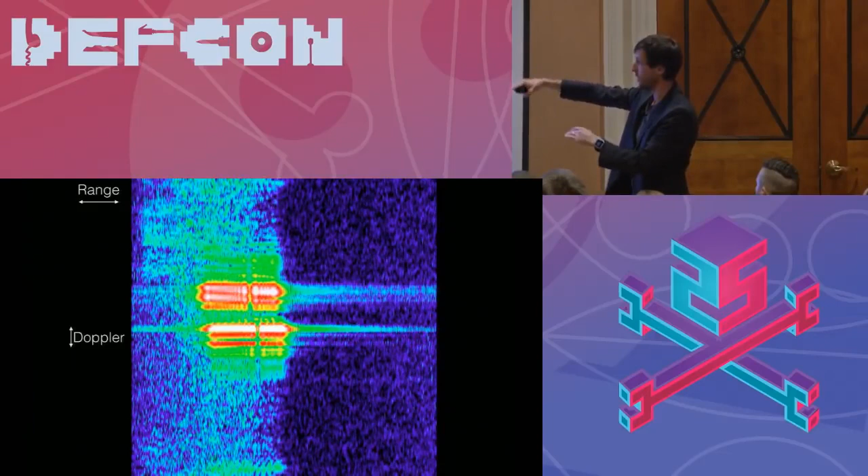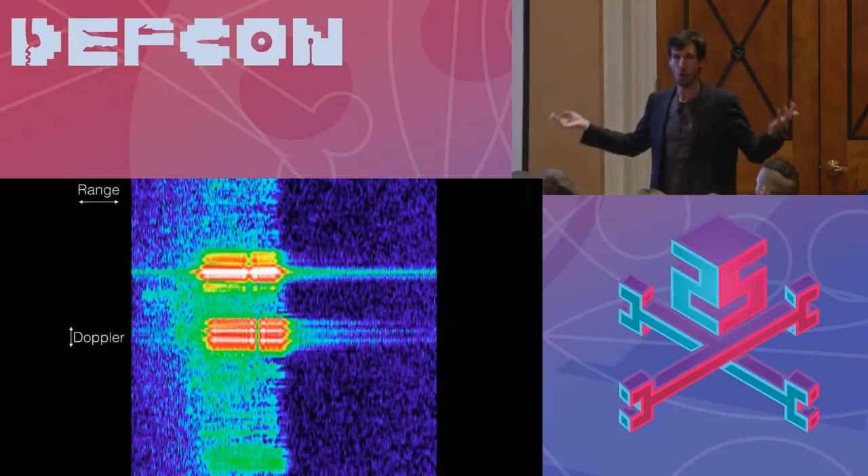Now, the disclaimer is I have no idea exactly what we're looking at. I mean, obviously there's range and velocity information in there, and you can see that there's some cool stuff happening. Like there are these returns here. And in terms of velocity, which is on the y-axis, things are moving in a direction away and toward the receiver. So there's stuff happening, and there are weaker responses out there. I don't know whether this is purely from the ocean waves or purely from the ionosphere. I meant to do the calculations, but I didn't get a chance. If you know what's contributing to this, I'd be really curious.

But you can basically take the parameters of the radar system and calculate how far those returns are and what the implications of that are. And it's this information that they take in the CODAR system and then map to figuring out the ocean currents from information gathered from multiple points like you saw on that map before. So you can generate cool plots. The last thing I want to show you is the television version with aeroplanes. So this is using passive radar again.

So with CODAR, I was using someone else's signal. In this case, I'm using digital ATSC terrestrial TV signal. And remember, like I said with the chirp, if you have a fixed thing that you're looking for and you want to run through your filter, in the case of ATSC, happily, in the middle between picture information, there is this synchronization sequence of a fixed length, and it's documented. So this now becomes the filter, not FMCW chirp anymore, but the standards-based synchronization sequence for ATSC that we end up filtering and correlating on.

And this is in all TV signals, and what's nice is that they use incredibly powerful transmitters that'll broadcast the signal over a broad range. I had this set up first in my house where I had this directional antenna pointing out to a highway. This is the view from our place. There's the 280 highway in San Francisco that runs there. Cars are moving back and forth. They might end up being decent radar returns. And so you can see how they're moving there. One direction of traffic on top, the other on the bottom. They're metallic, so we might get some returns.

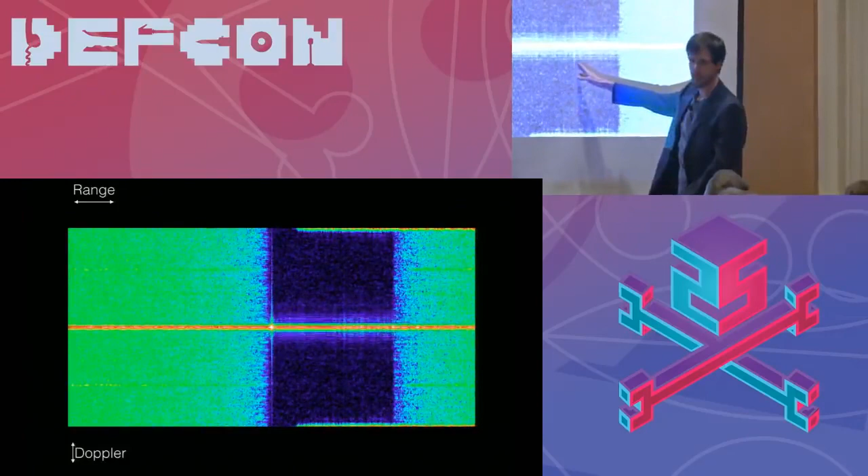And what's interesting is, in terms of range, these ones are actually further out. We wouldn't see them, right, if we didn't do the Doppler processing. But because we do, we basically ignore the zero velocity line, and these targets are moving, so they make themselves apparent on the rest of the plot. Let me go to the next one.

Some of them are more obvious than others. So you can see there that line. And the reason why it's streaked like that, remember I'm reading out of my interleaver faster than the integration period, so you basically end up smoothing together one integration period with the next, and so you'll basically get the blending of velocity information as you go.

Try another one. So some of them are really obvious. And what was interesting is that the planes that are overhead are obviously going to be very close. I think one pixel here is 30 meters, or maybe 40 meters. And so they all end up being quite close, especially as they're flying in overhead. But what really blew my mind later, I can't remember which of these videos it is, unfortunately, is that there are dots that appeared further out. And they stayed there with slowly changing velocity.

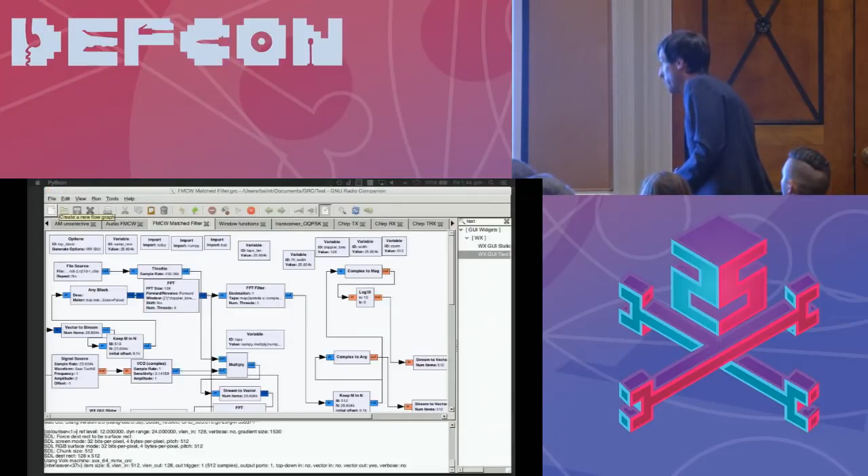So here we've got, let me find it here. Oh, one thing I want to show you quickly. This is the live processing of the CODAR, right? So the HF one. This should look familiar from the video. What I wanted to show you here is, in this plot, you know how I was talking about usually when we take FFTs, we always take the magnitude and we always forget the phase information? This plot is showing you phase information only. So consider it like a waterfall, but instead of showing the magnitude, it's phase.

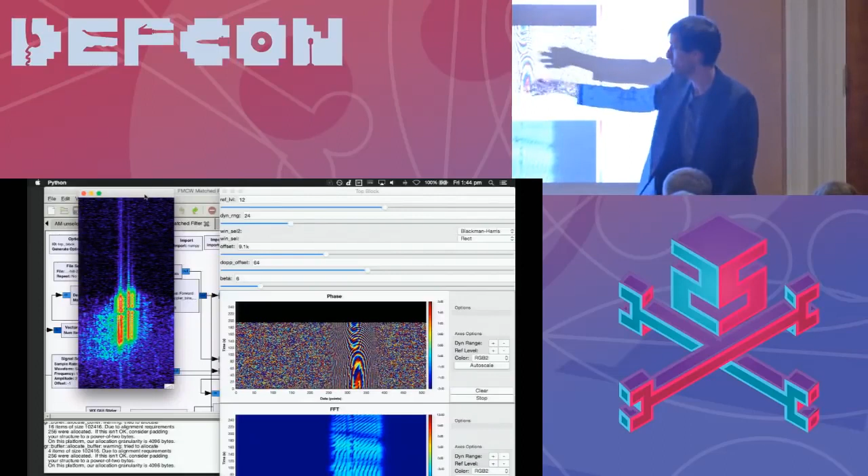And remember how we had those interesting shapes coming up, and there are strong returns, so there's going to be some information there. This looks like noise because there's nothing strong there. But amazingly, you can see this phase structure in these range bins in the return. So I'd never looked at a phase plot like that before, a phase waterfall, and it kind of looks cool.

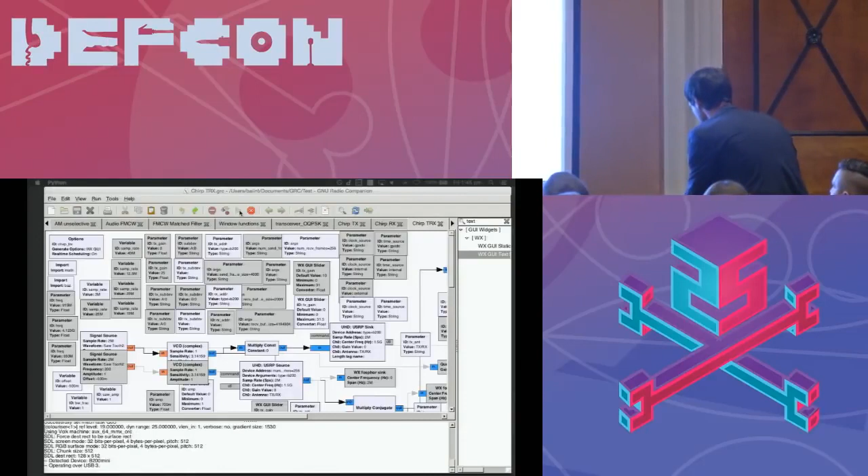Yeah. So let me find the, I think it's this one. Let's try this. So this is 2 mega samples per second. Oh, let me show you that workbook. Somewhere. Yeah. All right, here it is.

So this is a Jupyter notebook. You basically put in the speed of light, put in your frequency, put in your bandwidth, which is effectively your sample rate, and then it'll calculate range resolution. You put in your pulse repetition frequency. You can plug in anything you want into the equation, and it'll output all this information. So for a given frequency, it gives you the wavelength, the range resolution. For a given pulse repetition frequency, it'll give you pulse duration. Given bandwidth, it will give you unambiguous range, unambiguous Doppler, unambiguous velocity, and then you can figure out the scales on all of these pictures from that.

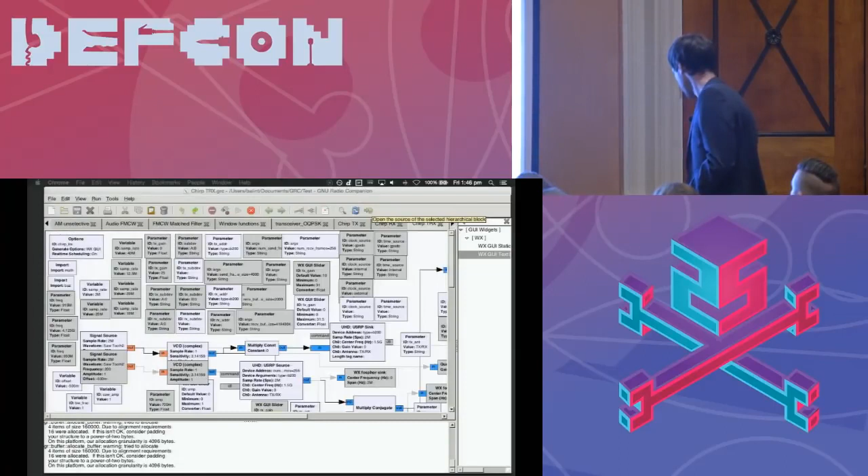Let's see what's happening here. Oh, it's running. Cool. So I've got this flow graph here, and then I've got the plot here. Nothing's showing, which is a little bit... Oh no, of course nothing's showing. Skylar correctly points out, thank you, another audience contribution, that the default configuration here is everything's off because I don't want to blow anything up.

And I've got these 2 directional antennas here. One is the transmitter and one is the receiver. So I can put them next to each other, and I'm just going to do a very quick setup and put my bag in between. Hopefully that won't affect things. And I'm using a B200 Mini here in a custom 3D printed case. And let me try doing this. This is really arbitrary. Something like that. Okay.

And now, no guarantees. It also works better if you're using separate transmit and receive USRPs. For example, I did it with a USRP with a MIMO cable, so you can synchronize the clocks, but the actual boards are different and they won't interfere with themselves as easily as they do with a single unit. So I'm going to set the gain. I think I use about 50. Receive gain, I'll go, I don't know, 33. And then I'm going to set my, sorry, I have to bring it over here, my amplitude of the signal to 0.7.

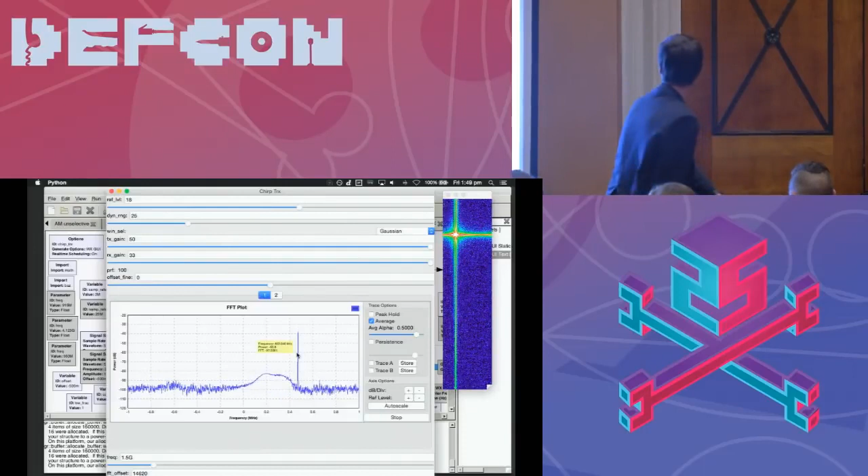Okay. It might be too much here. Oh, there it is, see? See how we've got the center line, which is actually offset. I haven't figured out why that's offset yet. But as I move my laptop toward and away from the receiver, you can see that even though it's in the 0 range and it's still overloading, you still get velocity information. And so that's basically how RF radars work.

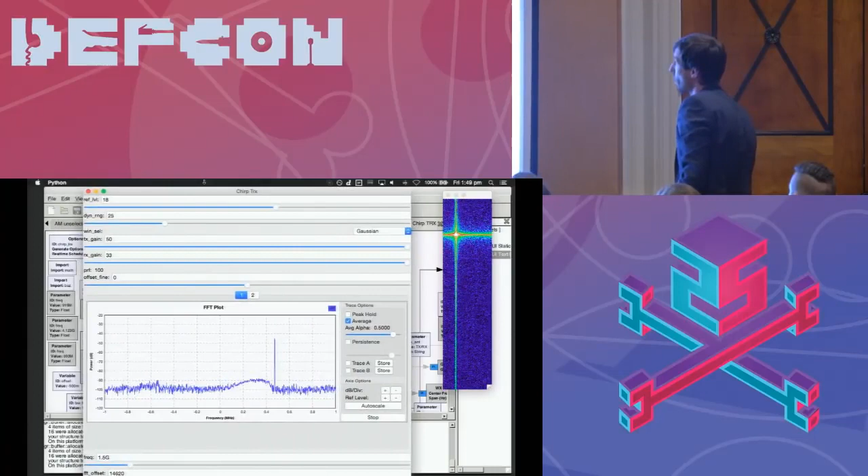Now let's see, because I promised you music. Let me plug in the speaker there. So it's a little bit finicky in that I need to do that, and then I need to change the offset here so that it ends up going into the 0 bin, because that's the one that's being transformed.

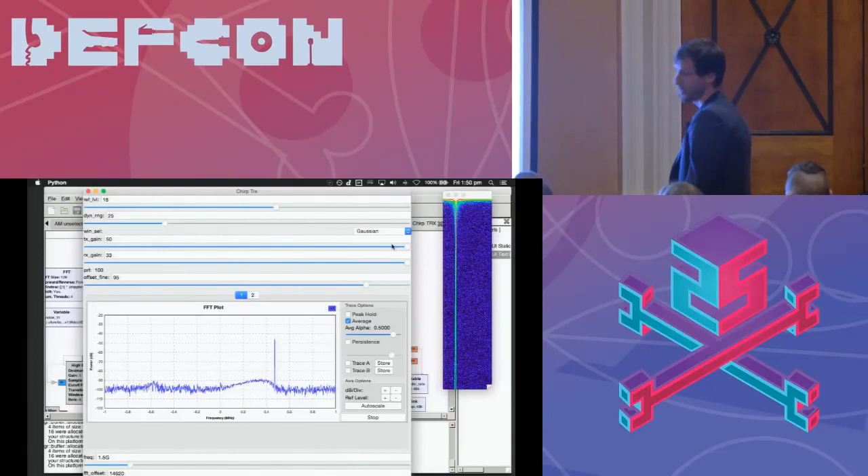Do I have the audio actually on? I do? Sorry, what's that? Your speaker volume is down. My speaker volume is down. There we go. Thank you. Another audience participation. Nate, what would I do without you all?